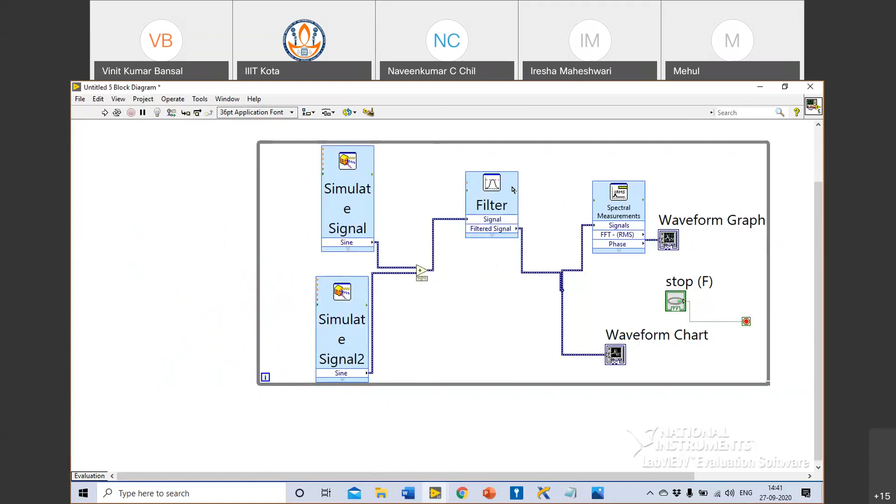I'll increase the order of the filter. I had used a third order Butterworth filter, but now I'll use a ninth order Butterworth filter. And we would see that the power of this noise signal should further go down. So the power of the noise signal now is less than minus 200 dB. Minus 200 dB is lower than the theoretical noise floor. So you can see that the signal has gone below the thermal noise floor, and hence the ninth order Butterworth filter in this case is able to help us reduce the noise signal to a very large extent.

Now, with that, I will jump on to another application which we had promised, that is the Talking Tom application. So people who had not installed DAQmx and were not able to follow me during the last session, from now onwards, will also be able to participate and make the program at their end. So don't worry if you don't have DAQmx installed, that is not needed for Talking Tom. All of you who have LabVIEW installed can work along with me for this program.

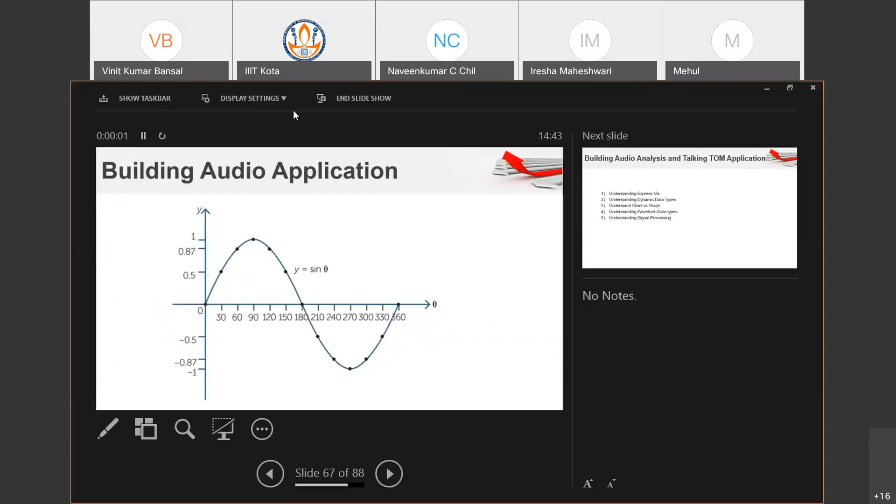So before I get into Talking Tom, I just want to deliver a small concept. Let's say I have these points, 1, 2, 3, 4, 5, 6, 7, 8, 9, 10, 11, 12, 13. So I have 13 points. These points represent what waveform? Sinusoidal waveform, right? Now let's say I plot these points in 1 second. That means this x-axis is not theta but time, and the 13th point ends up at 1 second. Then what will be the frequency of this waveform?

One by 2 pi. 1 by 2 pi, that's in the omega domain, but in the time domain, can I say it's 1 hertz? 1 hertz. Yes, sir. What if I plot these 13 points in 2 seconds? What will be the frequency of the waveform? 1 by 2 hertz. Yeah. Because I still have these 13 points, and my waveform doesn't finish in 1 second, but now finishes in 2 seconds.

What if I plot these 13 points in half a second? Let's say this point on the x-axis is 0.5 seconds. What's the frequency of this waveform? 2 hertz, right? Great. So if I have a waveform and I change the rate at which it is plotted on a graph, I can play around with the frequency of the waveform. Is that statement correct? If I change the rate at which these waveform points are plotted, will I be able to change the frequency as we just saw?

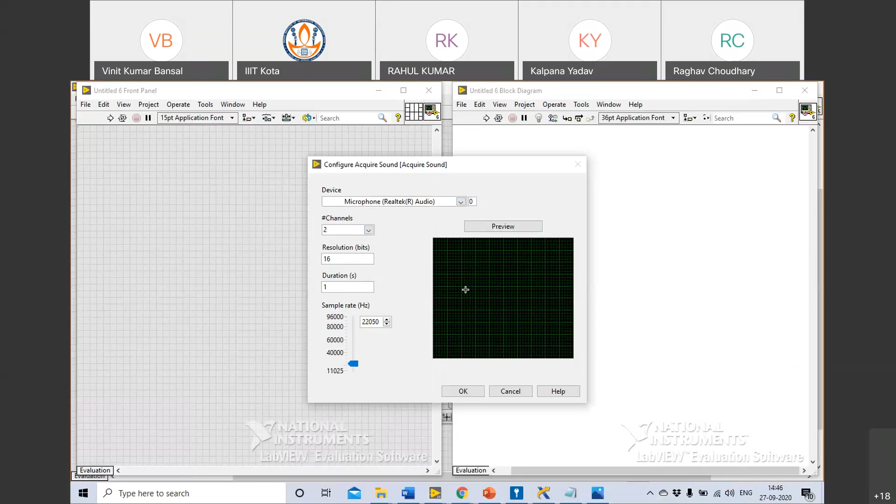So I'll use both the channels. I can preview my waveform here. So while I'm speaking, it is picking up the voice signal and putting it onto the graph. I will slightly increase this duration to 5 seconds. The rate at which I will acquire, I will keep it to 22 kilohertz itself. I can do it lower also.

Yesterday we discussed that human speech frequency is up to 3.4 kilohertz. So we can safely use 8 kilohertz also. Right now I'm using 22, but at a later point in time, we will reduce this to 8 kilohertz as well. Okay. And I can say, okay. Is it clear to everyone? Is everyone able to place this block onto the block diagram? Yes, sir.

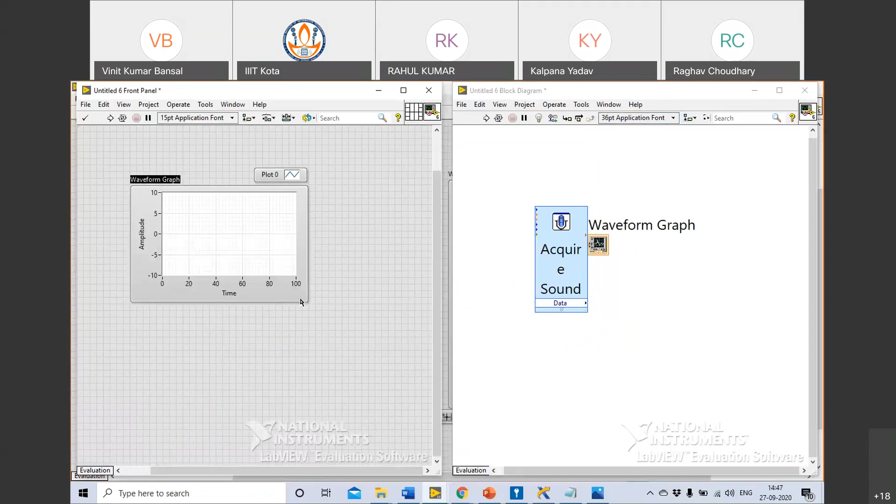Now, what we will do is we'll go to the front panel, go to silver, place a graph to see. Sir, what's the sample rate we have taken? Right now, we have taken 22 kilo samples per second. Okay, sir. So what we will do now is we will acquire this data and plot it onto a waveform graph. So on the front panel, we will place a waveform graph. And connect this to this.

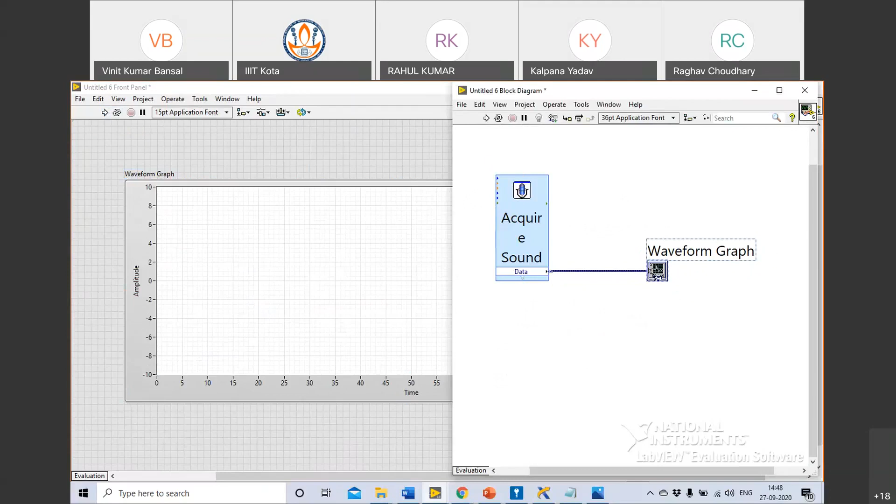Okay. Now we are connecting a waveform graph, not a chart, because what I'm doing right now is I'm not having repeated signals. I am just acquiring sound for 5 seconds and then plot it just once on the graph. Chart has a history. So in this application, I need not know about the history of my waveform.

So there's a request on the chat window to repeat the first step. Definitely we shall repeat. So I will delete whatever I had created. I'll go to the block diagram, right click, go to Express, Input, and Acquire Sound. In this Acquire Sound, I will choose microphone, channels, duration to be 5, sampling rate default. I only have one microphone device, so I'm using that. I would say okay. Is my voice audible? Yes. Is the step clear now?

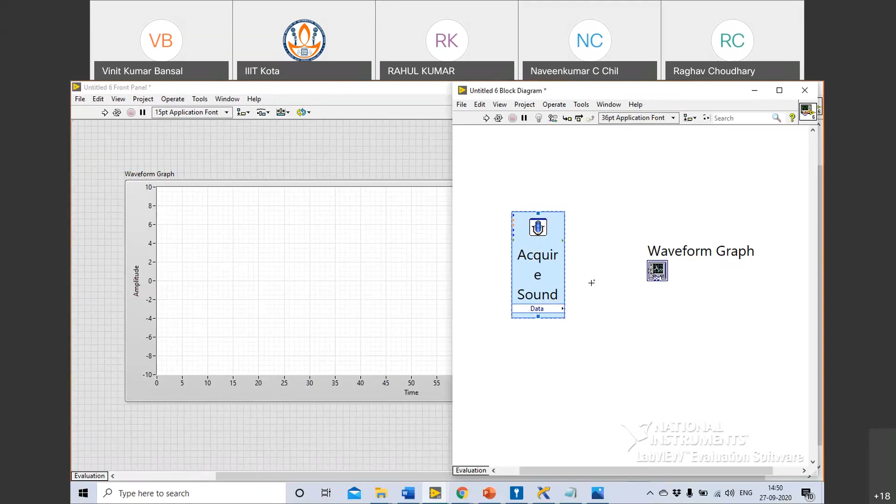Sir, actually, it did not ask me the permission about that microphone. Permission about the microphone? You have the microphone device connected? Yes, sir, I have 2 microphones, but it did not prompt any dialog box. When you place this Acquire Sound, it does not prompt any dialog box for you? Yes, sir. Can you delete that and place again once? Yes, sir. Just a minute, I will try. Okay. Yeah, now I got it, sir.

Okay, great. So once you have set the settings to duration 5 seconds, sample rate default as 22 kilohertz, and choose the correct microphone. I only have one, so I've chosen that. And you can then press OK. Once you have this placed, you can create a graph on the front panel and wire the graph to the signal being acquired from here.

Okay. So what I'll do now is on the front panel on the graph, I will right click, visible items, and graph palette. I will make the graph palette visible so that I can zoom in into the waveform which will be acquired. Anyone, any question? Okay. Now I'll test this out.

Let's say while I run this, I'll keep speaking something so that it's recorded on this graph. We'll say, hi, my name is Vinit. I'm conducting a LabVIEW workshop. Yeah. So this is the waveform of the audio signals captured by my sound card. I can go into each of these and analyze.

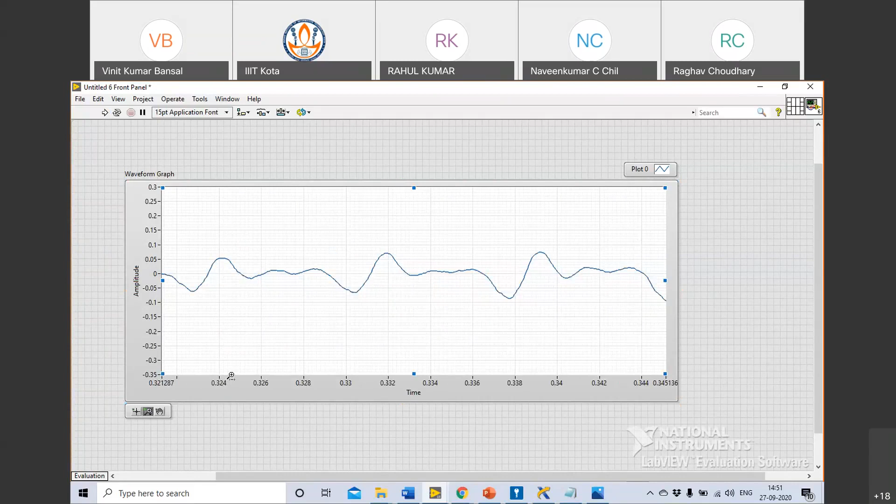So it shows only after 5 seconds, not instantaneously. It is not showing, right? That is because, Raghav, we have requested this block to record for 5 seconds and then give us data. If it was an actual real world case, while we would have met face to face, we would not have acquired this using your sound card. We would have acquired this using the myDAQ device, which has a microphone jack. That can give us much better control on at what rate we can acquire data.

After, let's say, 1,000 samples, we can keep streaming data back to host, right? Keep streaming data back to LabVIEW. But with sound cards typically, it takes a considerable amount of time to get back data from the sound card. So we don't do continuous acquisition from the sound card right now. Even if we do, we will keep missing some data in between. So we are requesting the sound card to record for 5 seconds and then just give us those 5 seconds of data.

Okay. In an ideal scenario, I would recommend to use a myDAQ or any industrial DAQ system which has a microphone input to acquire these kind of signals. But sorry for the lack of resources. We are in a different world in 2020 where we can't meet in person and do this kind of trials and exercises. So anyways, we have acquired data.

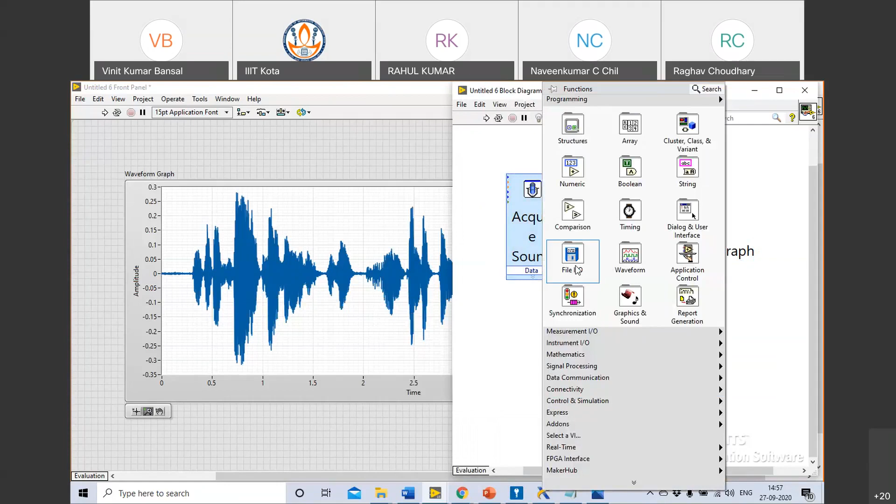Now I'll answer a question which one of us asked in the last session. What is this Express? Why are we going into Express again and again? So basically in LabVIEW, there are 3 kinds of functions. One is Express functions. One is low-level VIs. And the last one is the inherent nodes which are present inside LabVIEW. These are the inherent nodes. These are the subVIs, or low-level VIs, and these are called Express VIs.

Do you see any color differentiation between them? An Express VI always has this blue background. Whether I place a filter or an acquire sound, both of them have a sky blue background, right? So these blocks are called Express VIs because these are the ones which can be used to quickly acquire or quickly do a function through the GUI itself. In the graphical user interface itself, I can put all these settings and do my job.

So these are very easy to use, but they also have their own disadvantages. The advantage is that the ease of use is the highest with an Express VI. I can simply double-click and change settings. But the flexibility is something you lose while you use Express VIs. So once you become slightly experienced in LabVIEW, you will stop using these Express VIs and will shift to low-level VIs or the inherent nodes.

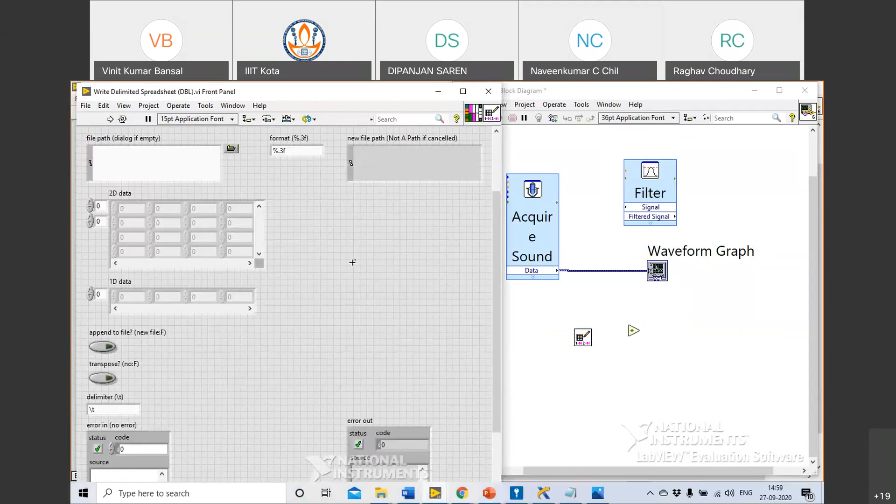These inherent nodes, which are yellow in color, cannot be opened further, even if I double-click. But if I double-click a low-level VI, I will be able to open its front panel, and further access the program written on its block diagram.

So what are the three different kinds of VIs? Express VIs, low-level VIs, and inherent nodes. Is that clear?

Among these, which ones we call low-level VIs? The IOs are low-level VIs, not the inherent nodes. A low-level VI is something which can be opened, and I can see a block diagram or front panel for it. In a low-level VI, I'll have to wire a lot of inputs and outputs to make it work, whereas on an Express VI, I have to do minimal wiring to do the same thing.

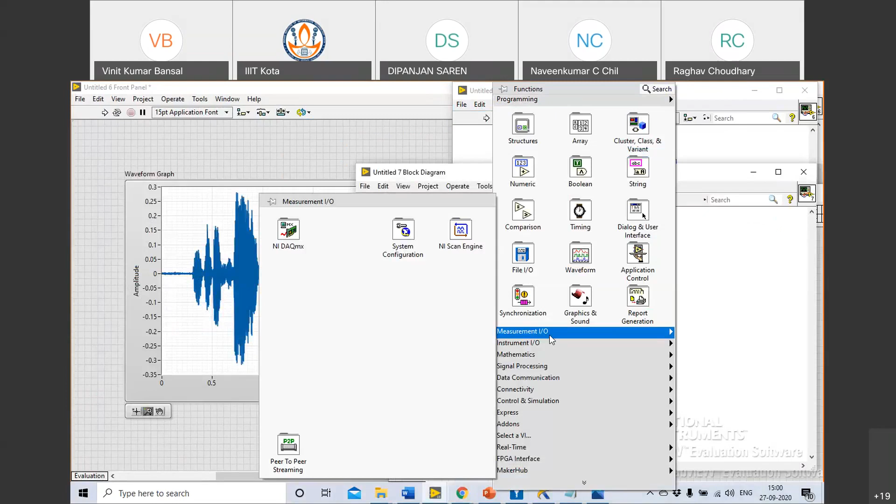Just to give you an example, last section we did something called DAQmx. We acquired data from our MyDAQ using the DAQ Assistant, and acquired an analog input. Finish - I'll leave it to default for now.

So we used this to build this block, but I can also do the same functionality using low-level VIs, though I'll have to use many more of them and connect them together.

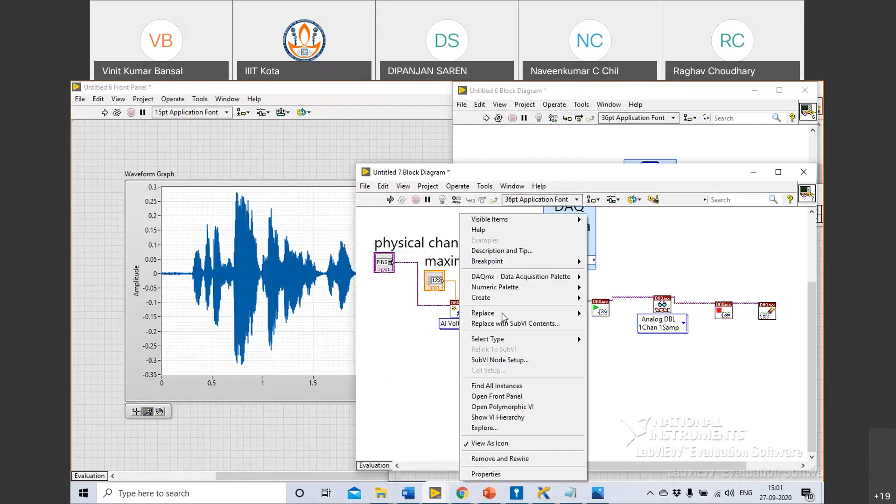Now if you can see these low-level VIs, I can change their maximum and minimum value, and which channel I need to acquire from in real time. Do I have that functionality here? Can I change that during runtime? No, because I have to double-click this block, and during runtime I cannot double-click and change the value. Whereas in the case of low-level VIs, I have these controls at my hand - I can change them during runtime also.

So the functionality which I have made here using low-level VIs is the same as the functionality written under this DAQ Assistant block. The only advantage is I get more flexibility.

Sir, one more thing I want to ask - it's a bit out of context, from the second session we had in the day. We used some spectral analysis block, and there we were getting a Fourier transform output of the frequency of the signal - a frequency domain output for the given signal. We used the waveform graph to plot it. My question is, why is that waveform graph named amplitude and time? If I am plotting a Fourier transform signal, it should by default take frequency as its independent scale, with amplitude still okay, but it's not taking it like that. So is it some error, or something overlooked in the design?

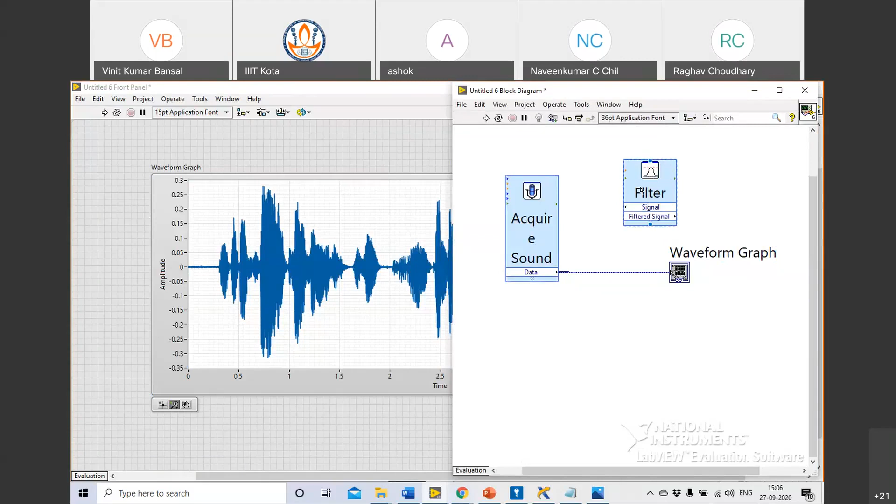So now, what I was explaining was that these are express VIs, right, and the low-level VIs were on the other screen. Why I brought up this discussion of express VI is because we learned about data types in our first class. The data type coming out of our express VIs is called dynamic data type. Now I want to convert this dynamic data type into my waveform data type. Now what is waveform data type?

To really understand waveform data type, let us first understand arrays. On the first day, Parikshit sir had talked about arrays. What is an array? It's a similar data type—one data type having multiple elements of the same data type in either 1 dimension, 2 dimensions, 3 dimensions, and so on. So how do we create an array? I go on the front panel, right click, place a silver control, go to array, and place an array.

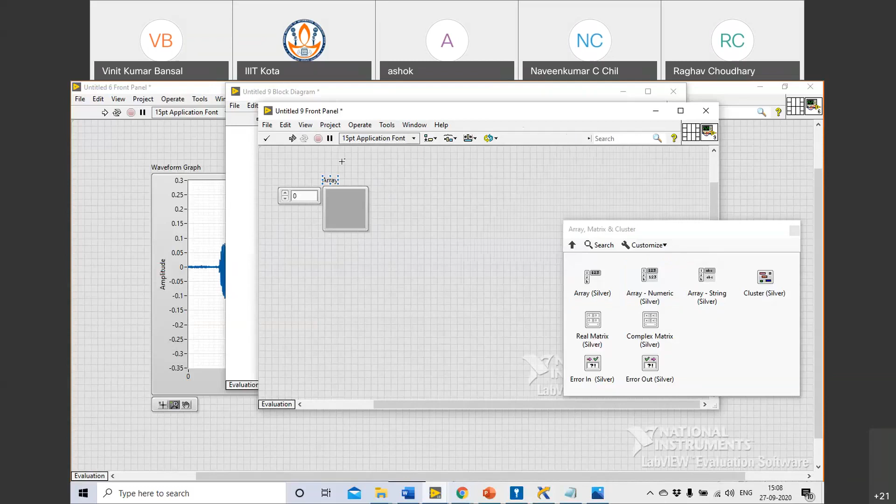Inside the array, you can see this array is black in color. What does black color represent? Black color represents that the data type is not yet defined in LabVIEW. To define a data type, I will go to the front panel, go to silver, and add a numeric control to my array.

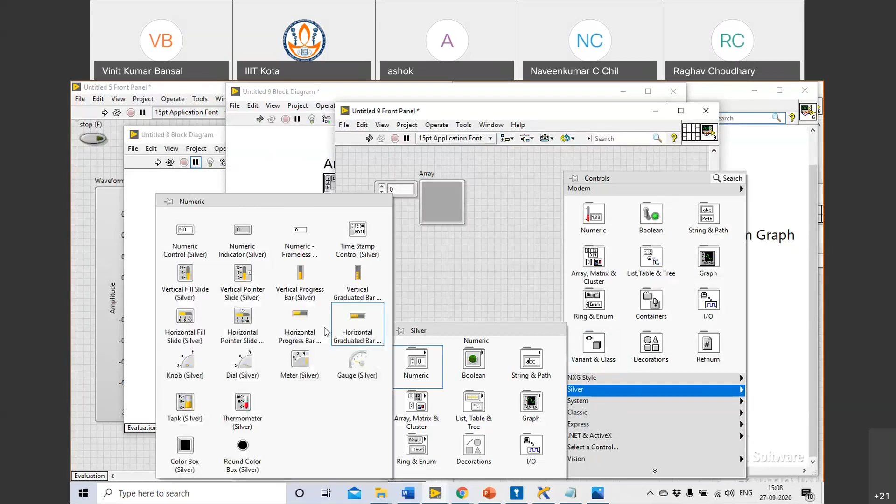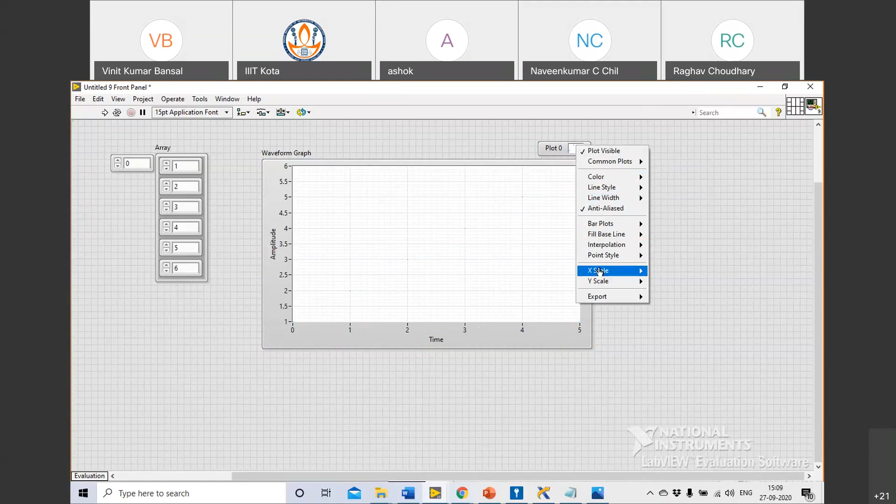Now I will add 1 here, 2 here, 3 here, 4 here, 5 here, and 6 here. So these are 6 elements: 1, 2, 3, 4, 5, 6. If I plot it onto a chart—let's say a waveform graph—and go to the block diagram, you need not do this, just look at the screen. I will run this. What you would see is these points plotted at 0, 1, 2, 3, 4, 5. I can change the plot type so we can visualize this better—plot point style. You can see these points plotted here.

Can I by any means give an array timing information? An array is just a set of numbers—it is not giving me any sort of timing information. Am I right or wrong? You're right, sir. What if I want to give timing information along with these numbers?

Can I give timing information in an array? We just discussed that an array is of a similar data type, meaning all elements in the array should be of the same data type. So what do we use for elements which have different data types? In C, we use structures. A structure can have string data type, array data type, Boolean data type also, right?

So what I'll do is create a structure in LabVIEW now. A structure in LabVIEW is known as a cluster. I go to the front panel, right click, go to silver, go to array, matrix, and cluster, and place a cluster. If I look at the data type, this is again black in color—why? Because I have not defined the data type of this cluster. I will break this wire, bring the array inside this cluster, and say auto size to fit. I have this array inside this cluster now. On the block diagram, this has become pink, and the array is missing from the block diagram. Is everyone with me right now?

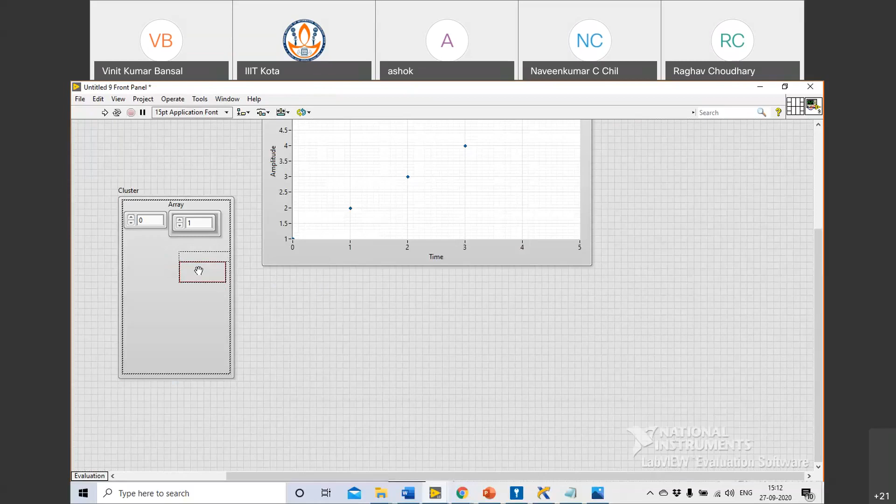Now I will add a numeric constant again, or a numeric control again inside the cluster. So one data type is an array data type, but the other data type is Numeric. Can I add a Boolean also to this? Yes, I'll go and add a Boolean also. So what we have now is an array, a numeric, and a Boolean together into the same element, right? This is called a cluster in LabVIEW. This is known as structures in C.

Now we have got an array element. Can I define my T naught here? Can I give T naught here? T naught would mean the time difference between two samples. Can I give it as 0.1 seconds? By doing this, can I integrate the timing information into my data? Do you agree or not?

No, sir. Okay, that means I'll explain it again, sir. I had this array separately outside first, right? This array had 6 elements: 1, 2, 3, 4, 5, 6. That is agreed, yes sir.

If I ask you to plot these 6 points on the graph, what will you do? You will just plot them against index, not time on the x-axis. The 0th index value 1, first index value 2, second index value 3, third index value 4, fourth index value 5, fifth index value 6. Right? But what I want to give is timing information.

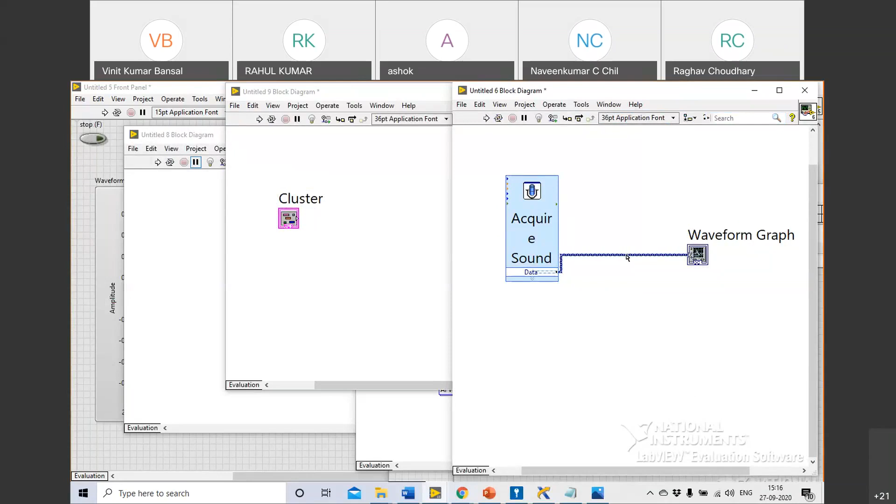This blue wire was a dynamic data type which came out of my Express VI. What I want to do is play around with the frequency of the signal so that I can make a talking tom, right? So what I'll do is first convert this dynamic data type to a waveform data type. How do we do that? Let's see - go to the block diagram, press Control+Space, and say 'convert from dynamic data'.

As soon as I place this on the screen, it gives me various options. Now, what I want is an array of waveforms. Why an array? Why not a single waveform? Why am I selecting an array of waveforms and not a single waveform?

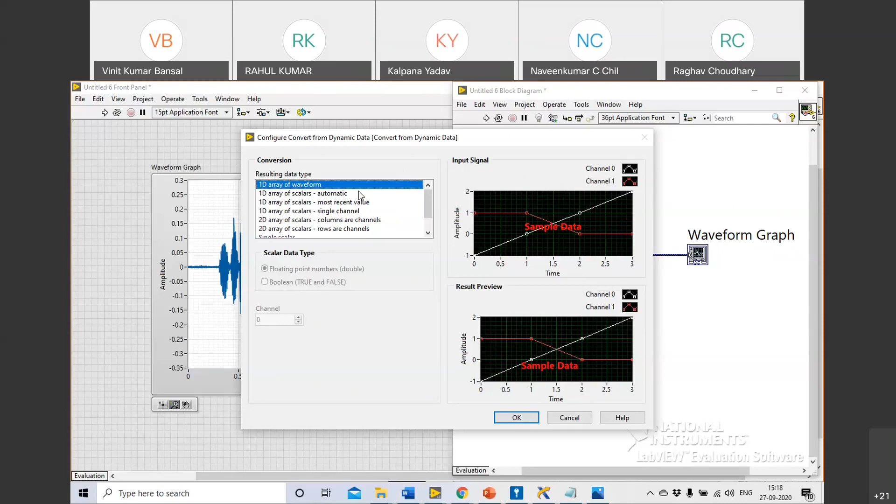How many channels did I select in my acquire sound block? Channel 2. Two, right? Since I have two channels, I will have two waveforms: one for one channel of the microphone, second for the second channel of the microphone. Agreed or not? Yes, sir. So I will choose 1D array of waveform, and I know there will be two waveforms if I connect this dynamic data as the input to this.

To confirm whether you had two channels or not, you can simply come to your front panel where you had plotted your sound signal. Just expand this. There's plot 0 mentioned. Just expand this. And once you have expanded, let me know. Then I'll talk about the next step. Okay. Once you have expanded, you see plot 0 and plot 1.

I'll go and click on the waveform, this line of the plot 0, and uncheck plot visible. So you can clearly see there is another waveform which is overlapping the first waveform, which is nothing but the second channel of my microphone.

Sir, kindly come again about that. Okay, no problem. Let's do that again. So you have this waveform on your front panel, sir. You have acquired the sound waveform. No, sir. Okay. You have this acquire sound block on your block diagram. Yes, sir. Okay. On your front panel, can you create a waveform graph? But that is the issue.

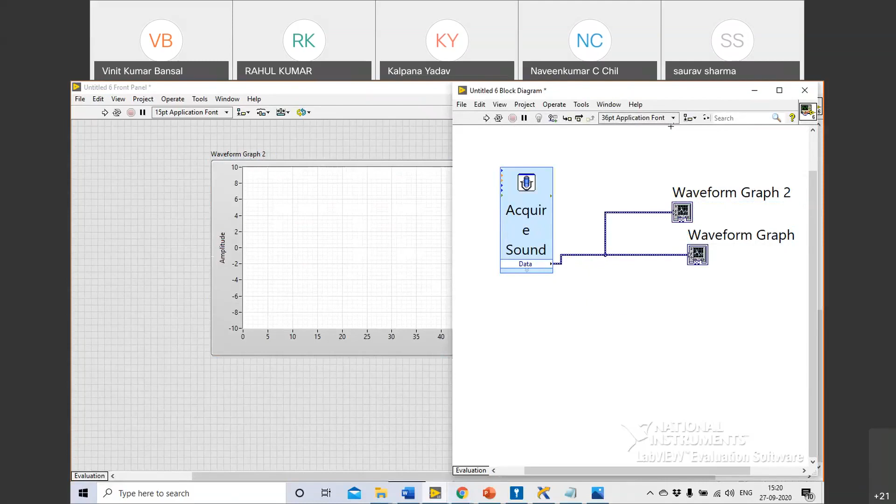Okay, now is the wire connected between the data output terminal of the acquire sound to the waveform graph? Yes, sir. Now acquire your sound. Let me acquire it along with you. Hello, my name is Vinit. I'm doing a workshop on LabVIEW. So you can see the data got acquired. In your case, were you able to acquire? Yeah, I'll just. I'm sorry, Saurav sir, I missed your voice. Okay, just test it out and let me know whether you got this data.

Now, what I'm claiming is this is two channels. Yes, sir. Got it? Great. What I'm claiming is it is two channels, not one channel. And if you drag this, there is a plot 0 mentioned on top of your graph. Expand this. While you expand this, you will find there are two. You can actually expand it further also, but that does not mean our waveform has that many channels. You can expand it to, let's say, plot 4 or 5, but start making each one of them invisible.

So let's say I make the first channel invisible by removing this plot visible property. So you can see there is a red waveform, which represents the second channel. I come to second channel and make this also invisible. Do I have any other waveform here? No. That means I only had two channels in my data.

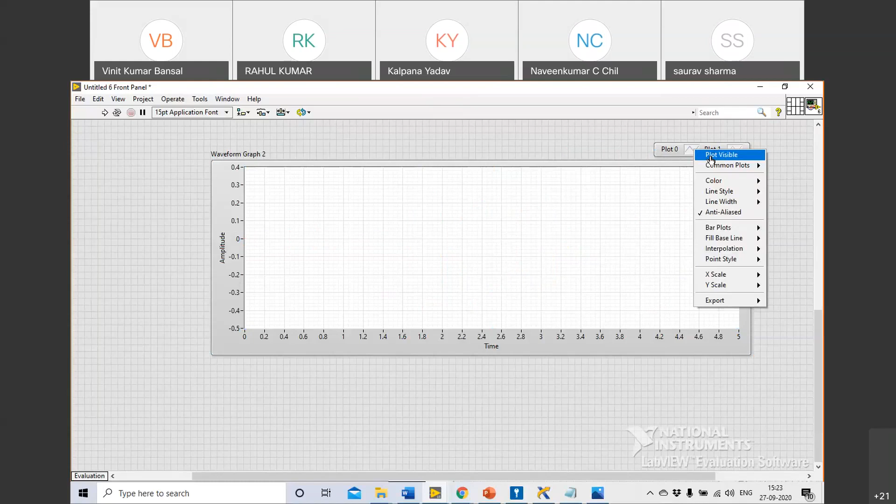Okay, so we have these 2 channels here. So what I was explaining is this is a dynamic data type. I want to convert this dynamic data type into a waveform which gives me all the sample points. That means each of these voltage points or each of these sound level points along with the time.

And as we understood on the other window, to have time we need 3 things. One is the data points, the time between 2 data points, and the timestamp. And these 3 things I am claiming are available as a part of the waveform data type in LabVIEW. I will show you now how to convert this dynamic data into the waveform data type.

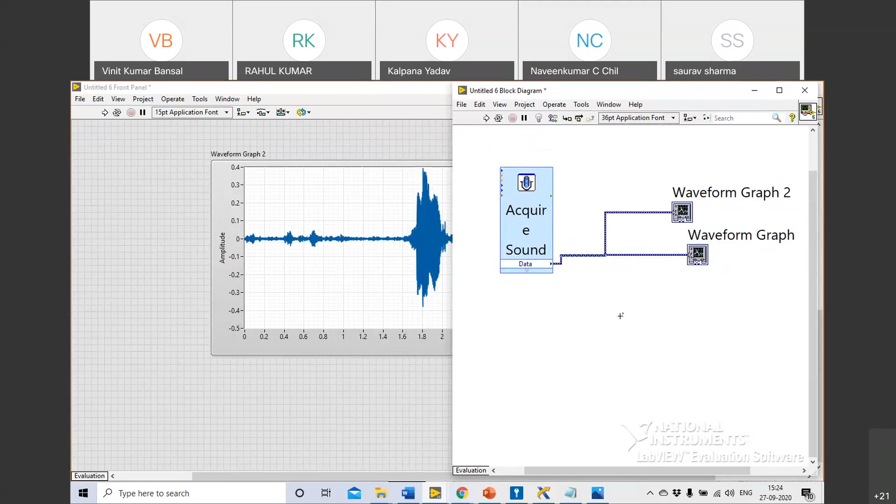Sir, do we need to create the waveform graph too? No. I just did it for one of the participants. He did not have data on his graph, so I was just helping him out. Yes, sir.

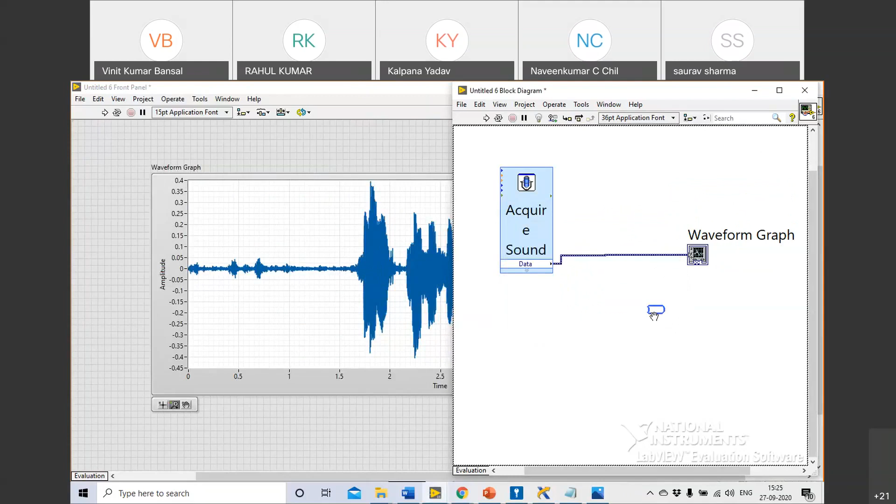So now come to the block diagram. Press Control Space. This brings up the quick drop window, and type convert from dynamic data. As soon as you do that, you find a pop-up box asking what data type you want to convert into. Since we are convinced that there are 2 channels of waveform in the data, I am using 1D array of waveform.

And I will connect it to this input terminal. Now the input is the dynamic data type. The output is array of waveforms. Now what I'll do is I'll again convert it back to dynamic data type for the moment and play the sound.

Sir, actually, I think I missed this one. I have opened this convert from dynamic data. What is the next step, sir? Choose 1D array of waveforms. And say okay. Okay, sir.

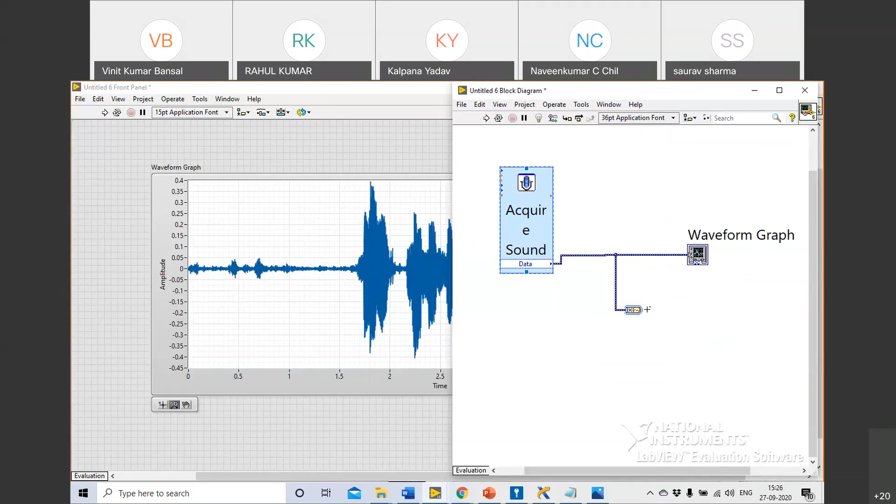So you have got your waveforms now. I can start manipulating these waveforms, or I can first play these waveforms to see whether my loop is working, whether I'm able to acquire and then generate it back or not. Let's try that. I'll keep it like this, and I will go to Express on the block diagram, go to Output and say Play Waveform.

You can test this device. So I have 3 speakers at my end. One is the headphone. One is the speakers on my laptop. And I have a secondary monitor connected, which is from Videocon. That also has an audio output. So I have 3 output devices. I will choose the speakers of my laptop to test this.

If I click test, it will have a sine tone signal played. You could hear that. Yes, sir. So if I click test device, I can hear a sound being made. So I'll place this block, choose speaker, and say OK.

Now, without manipulating any data, I can simply play back my waveform first. I'm not using this right now because this I'll use to make Talking Tom. What I'm doing right now is acquiring and simply playing back just to check whether my microphones and speakers are working fine or not. So I will run it.

Now, don't make your program, just look at the screen for a couple of seconds. So I'm running this, and I would speak out something. Say, my name is Vinit. You saw that the recorded waveform got played back. Yes, sir. So you can try it out at your end.

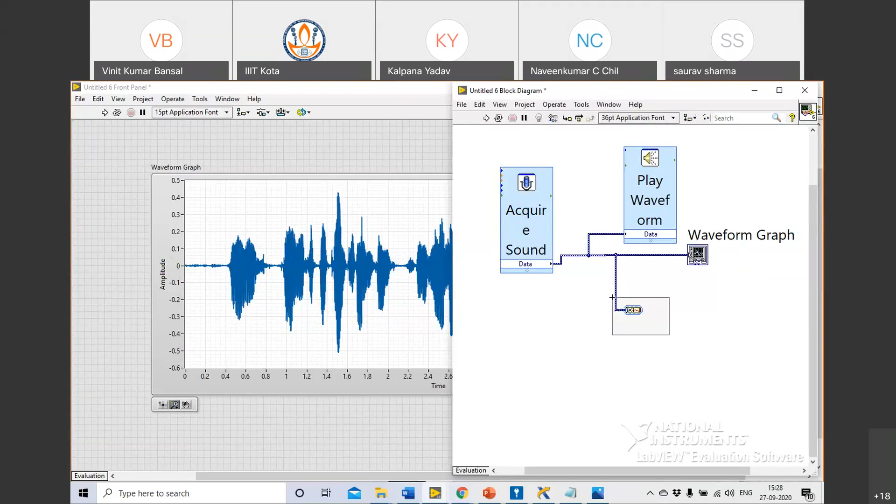So directly connect the acquired sound output to the play waveform. This manipulation I'll teach in a couple of seconds, but just test this piece out: acquire connected to waveform graph and acquire connected to play waveform. Once you have tested it, let me know. Then I'll talk about the next step. One of us says tested.

Participants, I know it's a Sunday afternoon. Hi. Hello. Okay. Sorry for that, sir. Actually, I was testing. It is replicating my voice. Understood, sir. No problem. You can test it while you keep yourself mute on WebEx. Sorry, sir. That's fine. No problem.

Okay, so we have this block. Now we know that we are able to acquire and play the waveform. If anyone is not able to do that yet, let me know. Otherwise, I'll move forward.

Okay, I'll move forward. I take that as yes.

Okay, now Vinit, yes, sir. One thing you tell me: while converting from dynamic data type, you have selected 1D waveform, right? Yes, sir, 1D array of waveform. Why have we not taken that channel one? Which one, sir? You have said now we are acquiring from 2 channels. Right, sir. Could we have chosen that 1D channel, suppose we are acquiring from 1 channel only?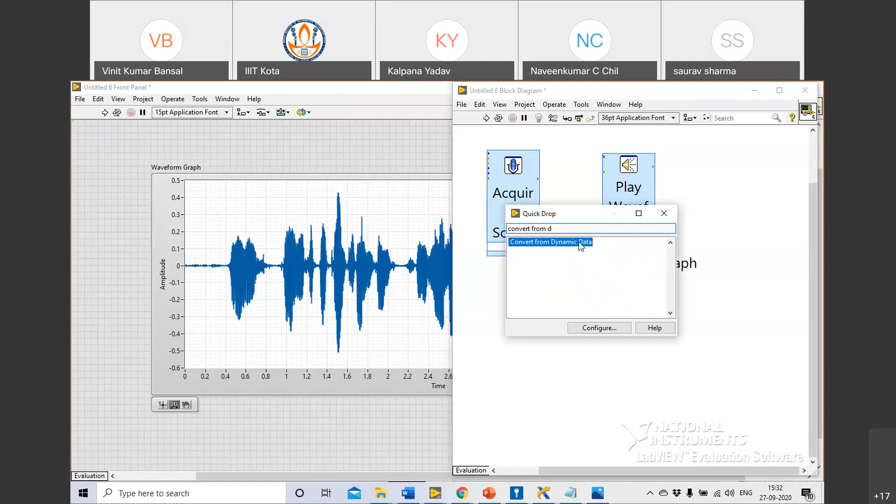Okay, so we'll choose 1D array of waveforms here. I'll quickly do this step again; some of us might have missed it. I'll go to the block diagram, click on the screen, press Control Space and say convert from dynamic data, and place this block onto the screen. As soon as I place it, it asks me for options, and I choose 1D array of waveforms, put it as input. Now I have 2 waveforms here. If you want to see, simply create an indicator to this.

Sir, I have a small request. You have enlarged the font size, but they are not looking standard. Can you just make them as they were earlier, if it's okay? The fonts are bigger than the icons. Okay, I can change that, sir. Not a problem.

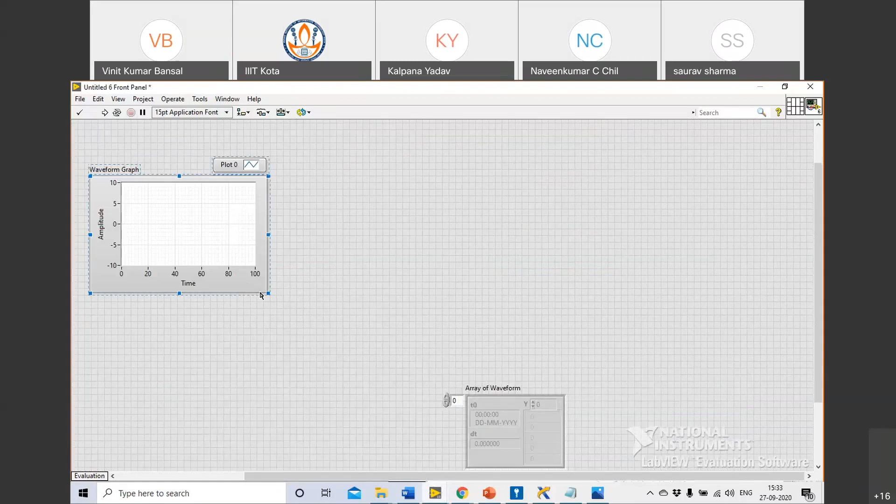Font dialog. Okay. Let me test that out. Yeah, it works. I will place some of them again so that you are able to visualize this better. We can read acquire sound in a single line here, but in the screen sharing it is 3 lines, a kind of distraction. Understood, sir. I'm making it a smaller font size so that you're not confused. Express output. Waveform. Okay, now it looks better.

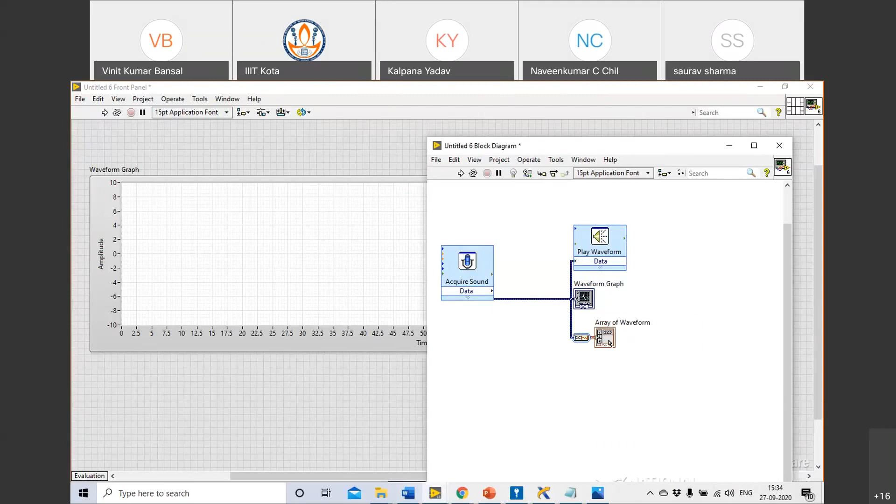So what I did is I placed this block of convert from dynamic data type into 1D array of waveforms. I got the array of waveform. On the output of this block, I right-clicked and said create indicator. If you go to the front panel, you will see the exact same thing we learned on the other screen: we'll have multiple samples, which is the array of sound levels, and there will be T0, the timestamp of the start of the waveform, and the sample time between each of the data points. Has everybody got that?

And in fact, this is not just one element of that kind, there is an array of that kind. So let's simply try this. I will acquire sound for 5 seconds. It's right now acquiring sound. Let us see once the graph is plotted. You can see the graph data is plotted onto this array waveform.

I have 2 channels. As soon as I make the array index 2, I don't see anything. That means there are 2 elements in this array: element 0 for one channel, element 1 for the second channel. Is that clear to everyone?

Sir? Yes, Raghav? Sir, here, as we can see, the arrays can have infinite length even though they don't have any data, right? I mean infinite element boxes. On 0 and 1 we have the 2 channel outputs, but we can still go to 2 and see that no data is there. So that means it is kind of an ArrayList in Java, right?

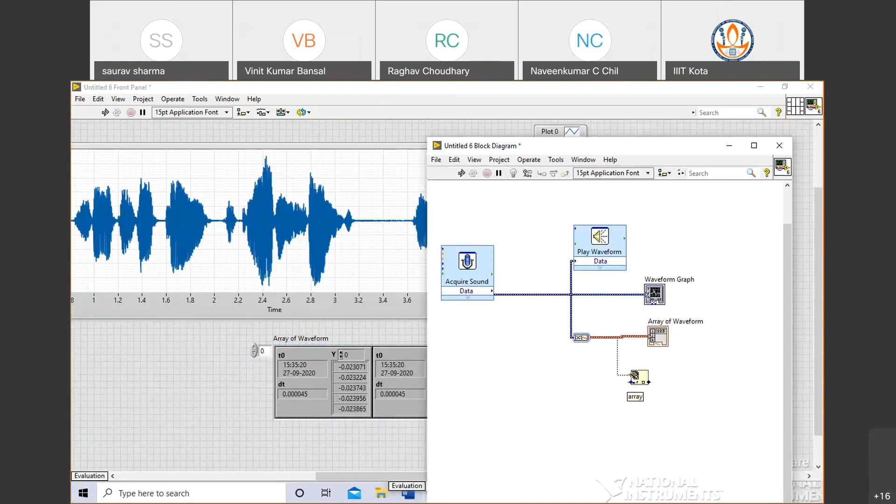How we will manipulate is, now this is an array of 2 elements. I will index this first. Index array and get the first element out of it. Indexed, got the first element. Index means getting an element at a particular index from the array. So I want to get an element from the 0th index of the array. Now I will press Control space and look for a function called get waveform attributes or get waveform components. And I wire this here.

Everyone done till this point? We will have to be a little faster. After the indexing, what have we done? Press Control space on your block diagram and say get waveform components. Then drag it down to 3 elements and then wire it.

Sir, actually, after the array of waveform, I did not get the next step. Okay, so after this, you know that this has 2 elements and I want to play around with each element. So right click on the screen, go to array and say index array. I basically want to index a particular element from the array. So I use the index array function, connect the array to it and choose the index which I want.

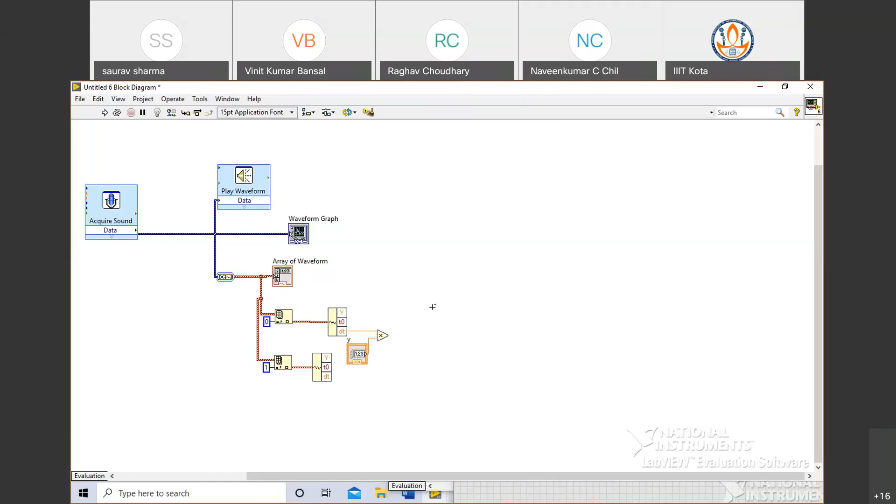Everyone done till this point? Participants, please help me understand if you have been able to reach this point. If not, let me know. I can help you. Yes, sir, done. Great. Thanks for the feedback, ma'am.

And now I'll search for another function called merge or rather build waveform. I'll use the function called build waveform, expand it, and choose the attributes accordingly. I will pass through Y elements as it is. I will pass through T0 information as it is. I will pass dt multiplied by a constant to dt. And I will do the same for the other channel as well.

Are you getting my point as to why I'm doing this? Basically, I will now manipulate the time between two different samples to change how my voice looks on the speaker or how it is heard on the speaker. Then, post it, we use the build array feature to remake our array.

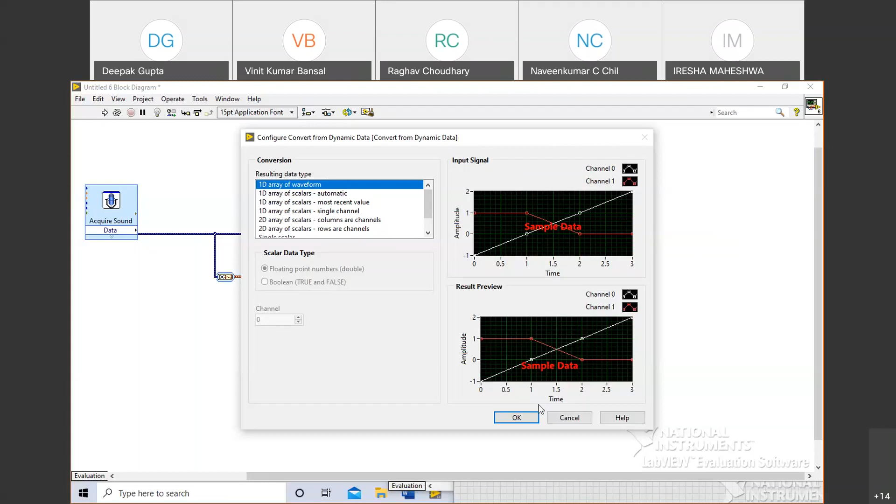Let's test this out. If I multiply dt by 0.5, then my dt will become half. That means the sample time between 2 data points will become half, and whatever I speak will sound like Talking Tom is talking. So let's try that out. I'm running my program. Hello, my name is Vinit. I'm conducting a LabVIEW workshop.

Could you hear that? Not okay. It's set to earphones. I'll make it to speakers. Hello, my name is Vinit. I'm conducting a LabVIEW workshop. Hello, my name is Vinit. I'm conducting a LabVIEW workshop. Now, were you able to hear that?

Yes. I can keep manipulating the multiplication factor for the dt to keep changing it. What if I make it 2? Now, instead of reducing the time, I increase the time between 2 samples. Let's try that out. Hi, my name is Vinit. I am conducting a LabVIEW workshop.

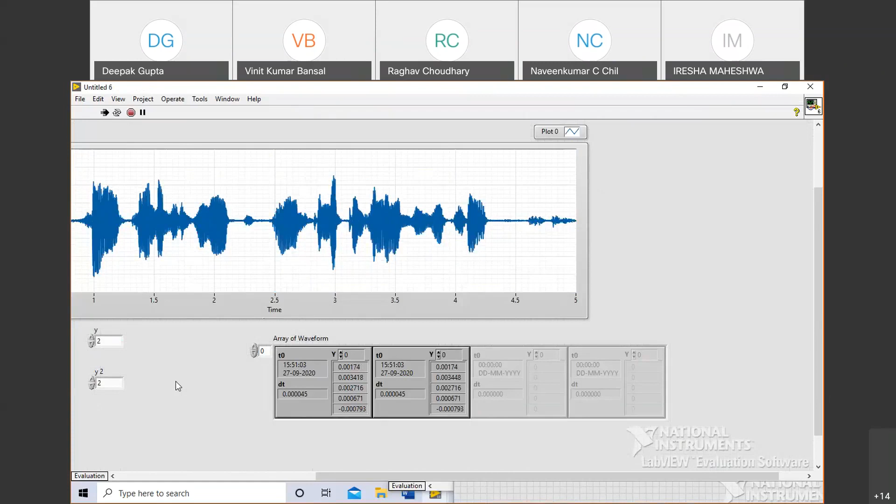Yeah, you could see how we could. Sir, we couldn't hear anything. Some kind of noise was there and that's gone. We couldn't perceive anything logical or sensible. Okay, no problem. Try it at your end, Raghav, because I'm running it on my speakers and then it is going from my microphone to your side. So there will be distortions, but try it at your end. Are you seeing similar trouble at your end? Sir, I'll try it right now.

Sir, what we are doing over here is changing the time duration between two samples, right? Yes, throughout the waveform. Throughout the waveform, we are changing the duration between 2 samples, and that duration is causing a change in frequency. As a result, we get to hear a different kind of voice. Absolutely. And that is how a Talking Tom works, right? So a Talking Tom basically increases the frequency of whatever signals it captures. So that is what I did here.

Okay, let's see if you can hear it this time. Let me change the audio out to my television, which may have a better sound level.

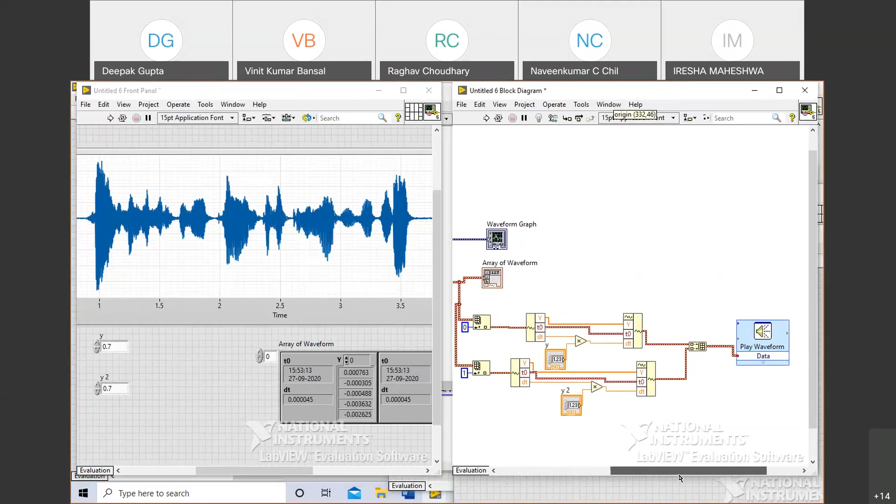Sir, these two create waveform boxes are showing a mirror image. Y0, T0 and DT are showing on the left side and this waveform is showing on the right side. So that means you have used a block called create waveform. These first blocks are get waveform components, and these blocks are build waveform.

Sir, in build waveform components, I can see two outputs of the waveform. It is designed like that so that we can take multiple outputs from the same block.

You are talking about this input? Yes sir, is that the output or input? That's an input, Raghav. What happens is, let's say my Y is same, I am not changing anything on the Y. My T0 is also same. So what I can do is reduce this, reduce this as well, and pass this waveform directly here. Only the DT of the waveform will be manipulated.

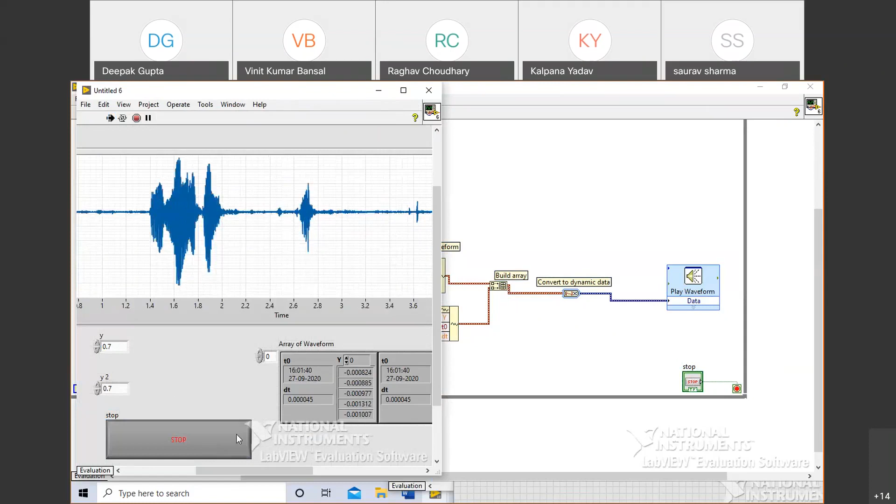You cannot, ma'am, because it's recording your waveform for 5 seconds. For the first 5 seconds it will continue to record, and for the next 5 seconds, or whatever constant you write, it will continue to play. So each iteration is running for around 8.5 seconds right now.

If you want to reduce this time duration, let's say you want to record for 2 seconds, that is okay. So you can say, hi, this is Vinit, I'm talking, and it'll continue to talk, continue to record.

Got it. I think now my application is working, sir. It's feeling like we are using it on a mobile phone. Yeah, we will not be able to mimic that professional application in this short span of time, but definitely you can build that level of application also. I have built it in the past, that level of application also.

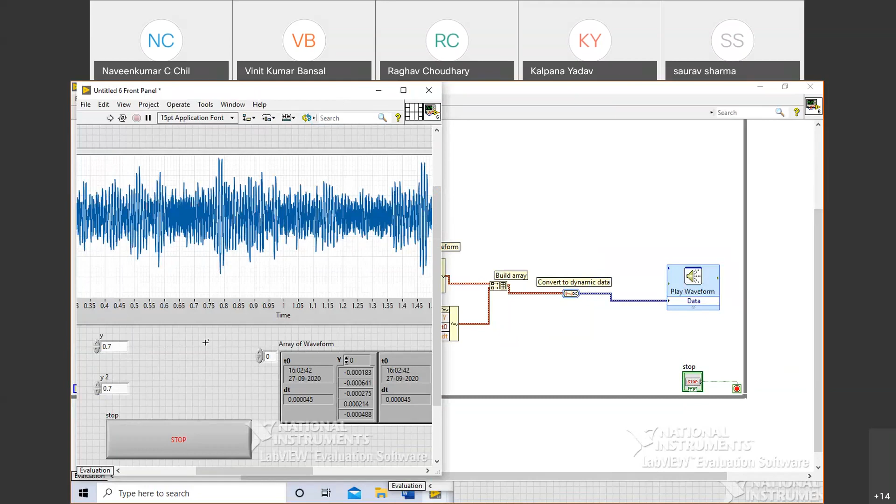Okay sir, but in that application I think it was automated, meaning it listens for a certain set of time and repeats by itself. Oh okay, I have not used that for quite a lot of time now. So just now it gave the same feeling, so I just said it, sir.

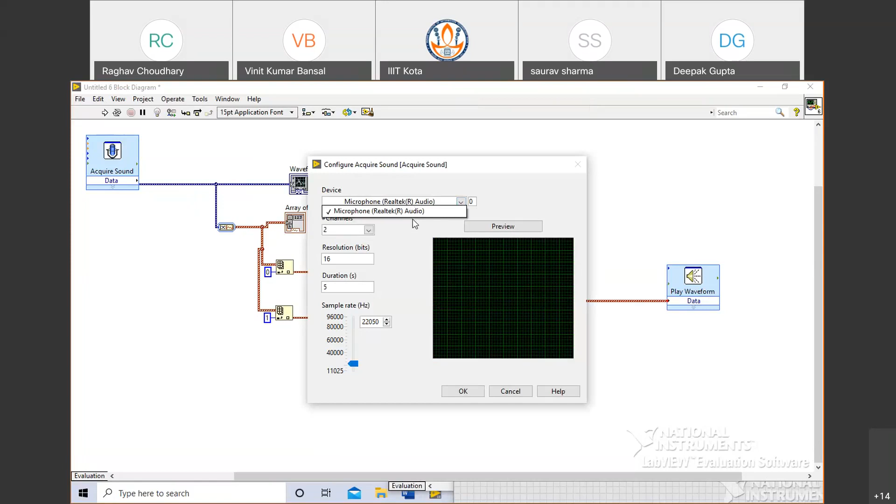And sir, as I can see in the block diagram, there's an option for connecting a device, like a wire loop coming from there so we can connect an external device. Does LabVIEW have any audio device we can connect, like a waveform graph? You mean this device index, this device input? Yes sir, this device input.

This is just a number, Raghav. Let's say right now the microphone, Realtek audio, on my laptop is assigned number 0. So during runtime, let's say I run it first with the first device, and then I want to run it with the second device, I can just increase this device index.

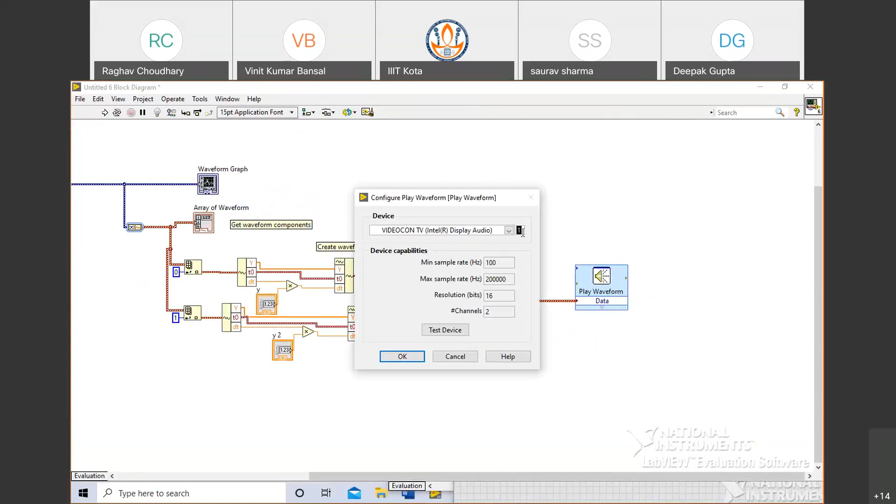And for playing the waveform, let's say right now I'm playing it on my Videocon television. These three are detected by my sound card, but if I want to play it on something else, I can create a control for this device and give a different index. If I give 2, it will play on my headphones. So basically this block will identify all the speakers and microphones, assign an index number to each, and we can give an external control to change it during runtime. Absolutely, with the control.

Now I'll answer your second question. We are engineers here, aspiring to hit the industry or at the verge of building our careers. Why are we learning about sound here? Is it really needed in the industry? When we go to industry, we don't acquire sound using our computer's microphone because it doesn't have that level of sensitivity.

In industry, let's say we have to do noise, vibration, and harshness analysis on a car. Let's say Maruti is building a new car and wants to launch it in the market. Before it hits the road, they have to get certifications from agencies like ARAI in Pune. While getting certified, they have to prove the sound level of the car is not beyond a certain level, so they won't use a laptop microphone. They will put a professional microphone there, typically from a company called GRAS.

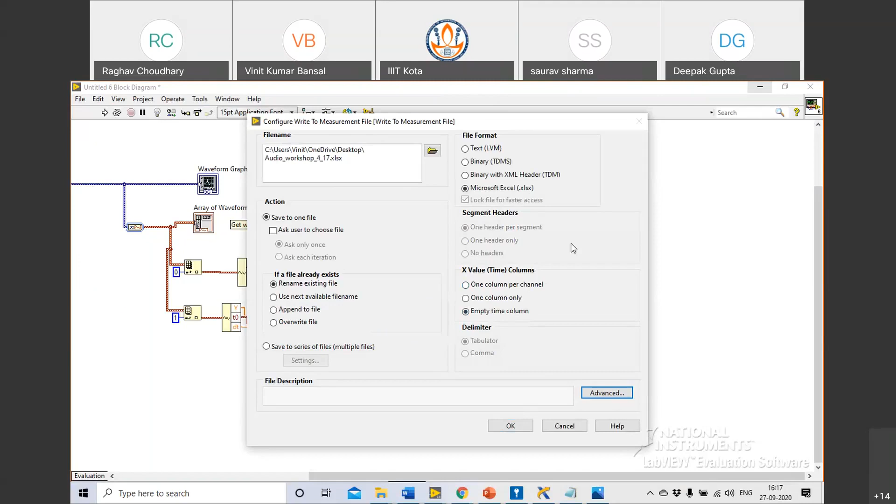Now, if I wire this data, this will directly go into the Excel file. Okay, selected. I added a control here just to show. Now, if I run this, I will be able to store this data into an Excel file. Okay, this is my Excel file. We'll see a couple of zeros at the beginning, and then towards the end, we'll start seeing your data waveform.

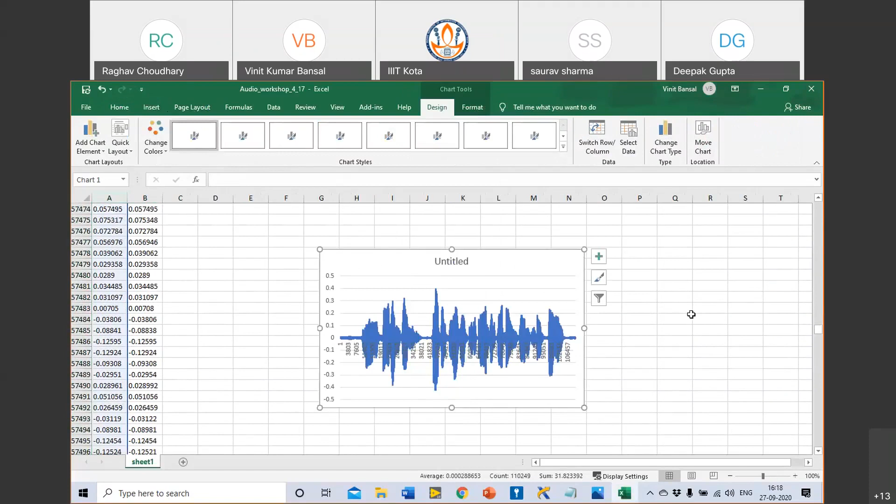Can you see these data waveforms? All of them are around 0, but 0 point something. You can also plot a graph here. Yeah. So the exact waveform which showed up on the LabVIEW front panel is being written to an Excel file. There's another way to write this to Excel. Once you have acquired this data, you can simply export it to Excel.

Okay, but that's not an automatic way. The previous method was an automatic way. Any doubts on this? Should we move on to the machine vision section? So write to measurement file, where you have taken it from: File I/O, then Write to Measurement File.

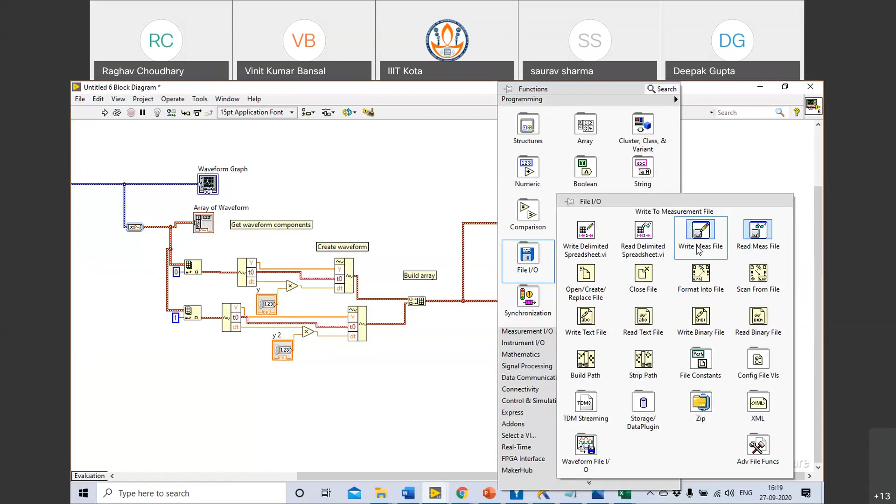But I couldn't find it. Write Binary File. Sir, in Modern only or in Silver? Raghav, it's a function. It has to be on the block diagram, not on the front panel. Achha, okay. Okay, sir, I'm in the block diagram. File I/O, Write Measurement File, Write Delimited Spreadsheet. Achha, yes. Okay, got it, sir. Got it? Similar way, you will have Read File, Read Measurement File option as well. Yes, sir. Okay.

With that note, I hope all of you could understand the signal processing application. Let's jump on to the machine vision application. We have got another 40 minutes. I'll try to do justice to the next 40 minutes. So how many of you have installed Vision Acquisition Software and Vision Development Module? Vision Acquisition Software I had given as optional. How many of you have not installed that? Could you please put that on the chat window?

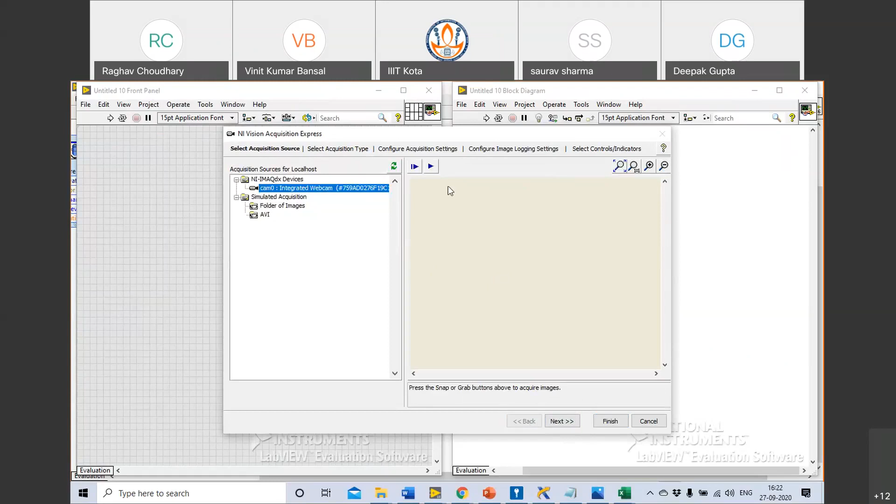It asks me for various options. Sir, I cannot see the preview. Okay, simply click on this play button. Sir, it's done. Now I'll show you a folder of images also. First, let's look at the camera, and in the next attempt we will play a folder of images. Let's click on camera, click next.

Now there are 4 methods in which I can acquire images from the camera. Sir, this particular window is not showing. Which one, sir? NI Vision Acquisition Express. The previous one was showing. Select acquisition type, do we need to select that? Okay, anyways, I think the problem is solved. That's great. So there are 4 methods in which you can acquire.

One is acquire a single frame and then process it, or continuously acquire and continuously process. Or acquire a finite number of frames and process them one by one: acquire one, it gets processed, acquire the second, it gets processed, n times. Or the last method: acquire 100, 20 or 30 frames in one go, and after they are acquired, process them one by one. Are all of you clear with these 4 methods?

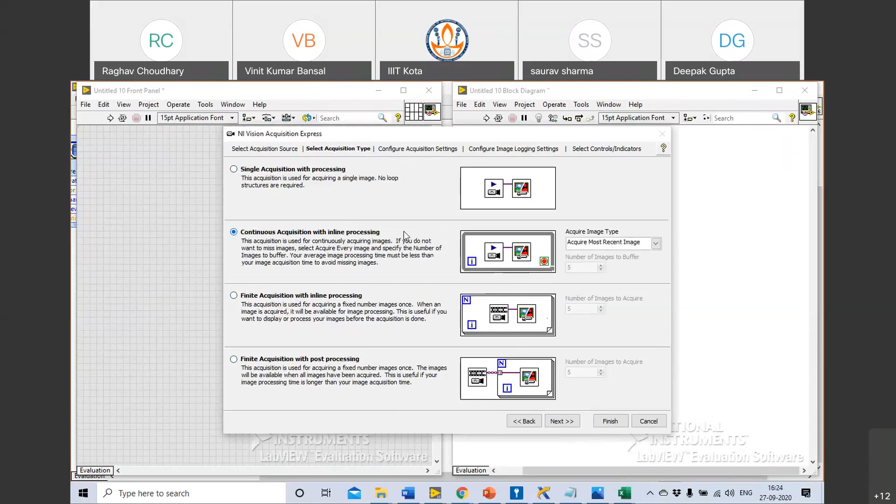I typically use continuous acquisition with inline processing, and I click next. It asks whether I want to log images; I don't. It asks what controls and indicators I want on the screen. I want the image number and the frame rate. Others I will leave and say finish. It's creating a LabVIEW VI. Okay.

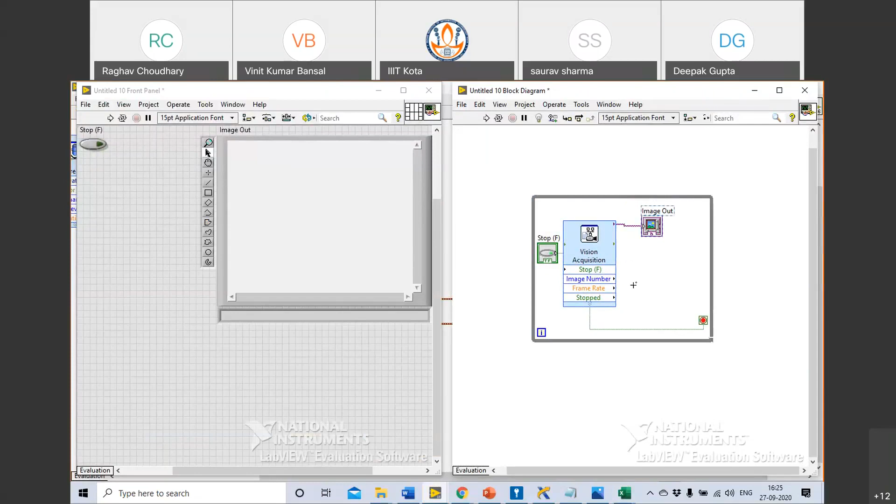Okay, so I have this while loop. I will create some space in the while loop to run this. I will look at the frame. I'll create a frame rate indicator here. Okay. Now I'll run this. You will see images being acquired in real time.

So it is right now not showing the full frame. It is showing half of the frame. So I can right click this and say zoom to fit. Okay. So you have a full view on the screen, and I can stop it. So by just simply putting this block, we are able to acquire images from the camera.

While you work in the industry, definitely you will not acquire images from the computer camera. You will use an industrial camera. What does an industrial camera look like? I'll just show you. An industrial camera is typically like this. Yeah, these are the standard cameras for a company called Basler. It's a German company. They typically connect over USB 3, Ethernet, or Camera Link to a computer. Okay.

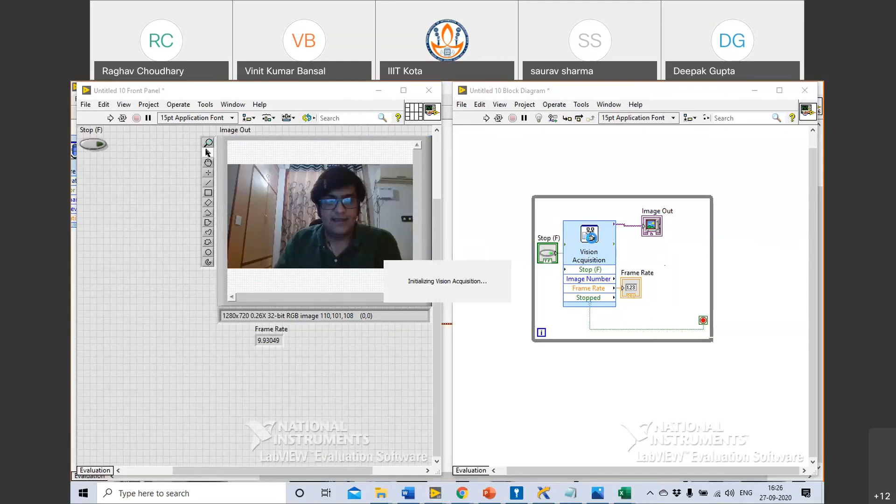So we acquired images. Let's see how we can process these images. I'll run you through a few examples of processing these images. Before that, I promised that I'll help you understand how to acquire from a folder of images. Let's do that. So I'm again opening the vision acquisition block. And I would go back to the acquisition source. I will choose folder of images at the acquisition source.

I would say next, continuous acquisition with inline processing. And now it gives me an option to choose folder of images. Let's say I use this image, cycle through the images. You can also enter this path. These images will be installed on your system as well. Okay. It is building the program. It has built the program. Now you can see it is picking up images from that particular folder.

Is that okay? Is it quite intuitive, difficult to understand? Guys? Hello? Am I audible? Yes, yes. You are audible, Vinit. Okay. Yeah, someone said it is easy, sir.

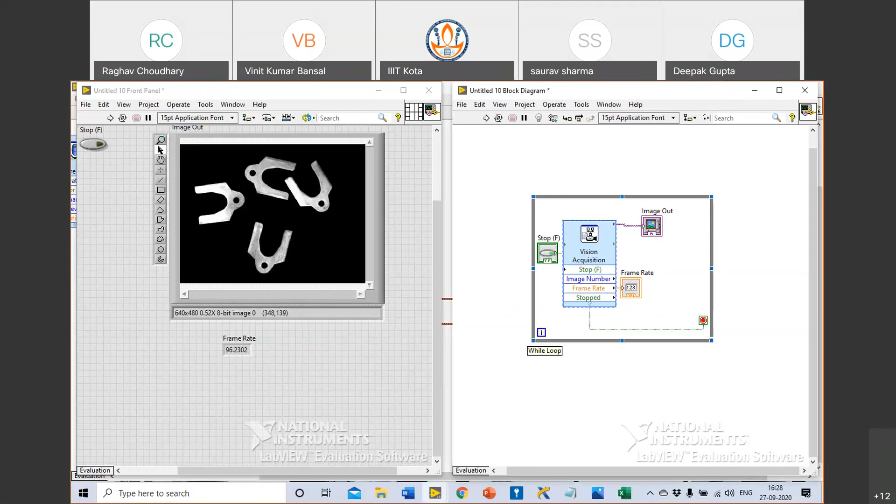Okay. I hope it's easy for all of us to understand how easily it can be done. I'll not spend too much time on this because it's quite intuitive. So let's get into the processing piece, which is slightly tougher. So do one thing: simply go to your start menu and type Vision Assistant. Okay, I will have to disconnect my second monitor before I open this because it needs a minimum resolution. So I will disconnect my second monitor and then try to open Vision Assistant.

Okay. Is everyone able to open Vision Assistant? I have reconnected back my second monitor. Okay, opening. It's opening, sir. So it's showing an error message. What does the error message say? It's saying Vision Assistant requires a minimum display resolution of 1152 by 864. Check your display properties. Are you using two monitors by any chance? No, I'm using a single monitor. I'm on a laptop, sir. What's the display resolution of your laptop? I have to check it. Yeah, just go to your display settings. You will find the resolution, right?

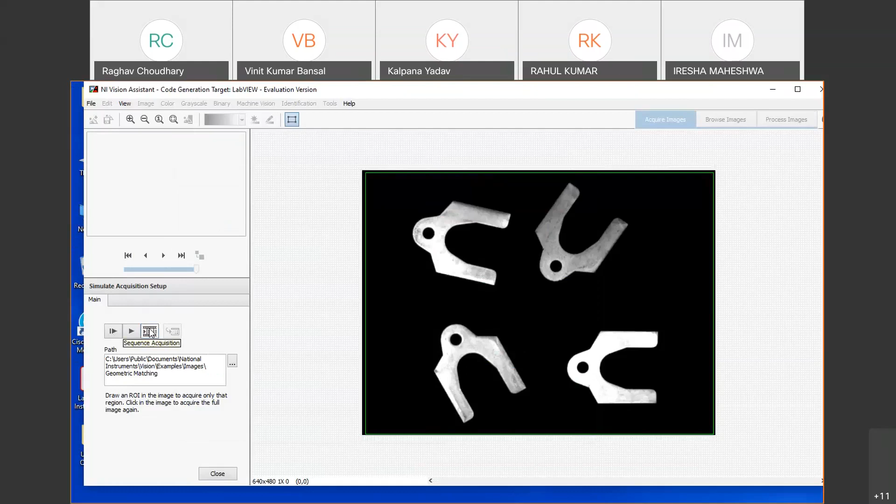Once you are in this folder, you can click on this option. This option will help you bring all the frames from that particular folder to the Vision Assistant window. So click on this, it will acquire a sequence of 11 frames. After clicking on this, I got this window and I would say next, finish. It is acquired, not yet. Oh, I had to click next to start the sequence acquisition and then click finish. So I can see each of these images. Done till this point.

Okay, I'll close this now, go to process images. Now let's say in an industrial application, these are certain sorts of washers. Let's say these washers have to go to the customer as a spare part. On a production line, we want to evaluate whether at least 4 of these washers are going to the packaging or not. So we put the camera, we grabbed images of the conveyor belt with these parts going into a single packet. I want to count these elements, whether they are enough or not.

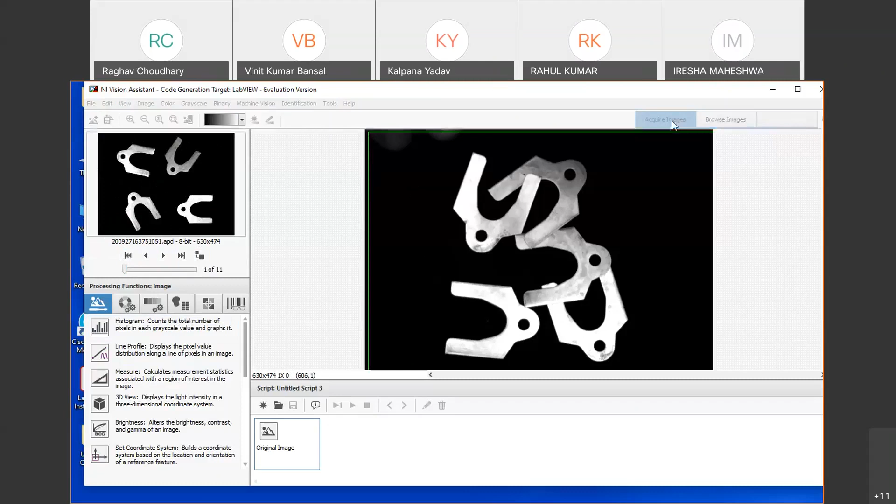So let me take a good image where they're not overlapping. Yeah, this sounds like a good image. I will use this image to create a pattern for geometric matching. Okay, there seems to be some problem. Okay, I had to go to browse image. After acquiring, I had to go to browse image. In the browse image, I can choose this image.

Once I have chosen this image, I will create a pattern of this particular object and run a geometric matching algorithm. Let's do that. So we acquired images, in the browse panel we chose this image where creating a pattern is easiest, and then we'll process these images. To process them, I go to the processing functions machine vision palette. In this, I have an option for pattern matching. I've clicked pattern matching. It will allow me to create a pattern. I would say next, and again next.

I would say finish. Okay. Sir, where did you find the pattern matching? I'll do that again for you.

So these are various processing functions in Vision Assistant. Okay. The first one is if I want to change the geometry of this image. Let's say I want to rotate this image. You can see image rotating. So first one is for geometry, masking of image, changing the brightness of the image. You can see the right image is very much bright. Right? So various processing options are available here.

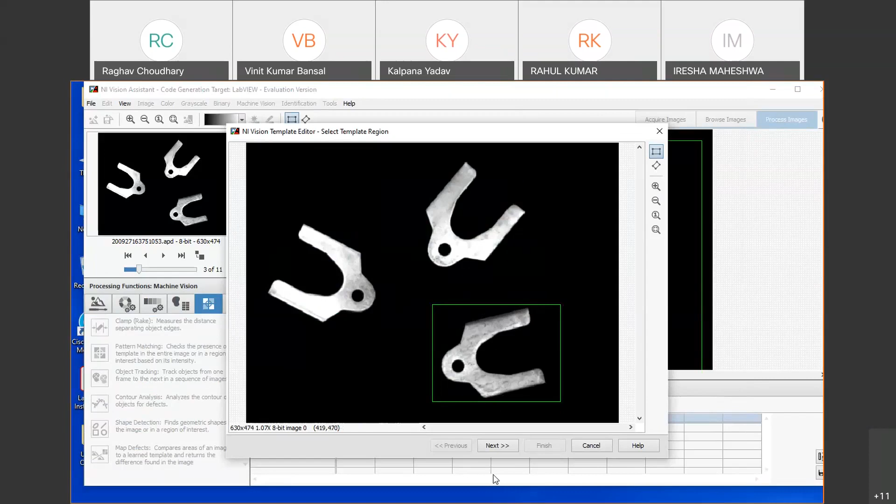So this is the area from which I want to create a template. I'll click next. Again, I'll click next. Here, you can remove a certain piece of the template. Let's say I don't want to consider this as a part of my template, then you can remove it. But I want to choose the complete area. Okay, I have removed this. Now it will consider all of this complete image as a template. If you want to remove certain sections, you can simply draw with your pen and remove them.

I would say next and finish. It will ask me to save the template. So I'll name it as template, saving it on the desktop, a PNG file. Now it asks me to set certain settings of this algorithm. First of all, it is asking me number of matches to find. I'll make it at least 5 or 6. So it will help me find 6 of these matches. Right now it has only found 1 match.

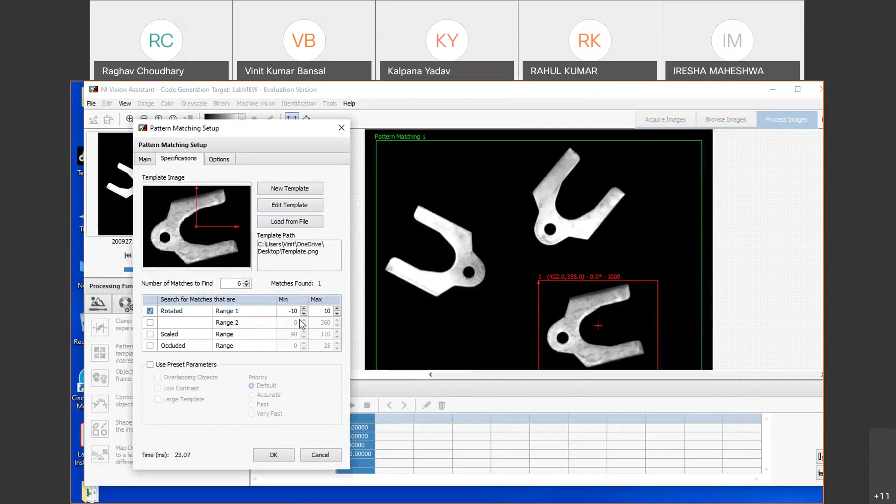Let's look at other settings. Other settings is, can this component be rotated? If yes, in what range? So right now it is selected as -10 to +10, but my component can be anywhere between -180 to +180 degrees. As soon as I do that, you can see the other 3 are also detected.

Now they can also be scaled in certain cases - one could be smaller, the other bigger, or it could just be the camera perspective angle. So I'll switch on scaling, somewhere between 80% to 120%.

They could also be overlapping with each other, as we saw in certain other samples, so we'll also increase the occlusion. They can be occluded up to 25%.

Then I'll go to further options. I'll leave the algorithm to geometric match, which is basically pattern matching with size and orientation invariance. The way pattern match works is it takes a pattern and tries to correlate that pattern across the whole image. Wherever it finds the maximum correlation, or a correlation score greater than the score set by the user, it declares that a pattern is found.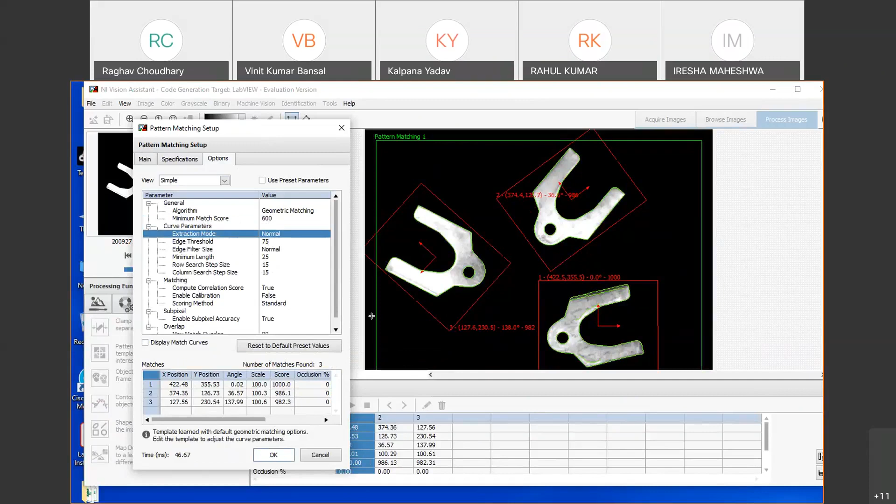Once I say okay, I can test it for other images by clicking this run button. You can see it has found 4 - can you see it has found 4? Now it has again found 4.

And this one also it has written. Can you see 4 boundaries? Yes, red color boundaries - it is detecting those.

If I double click this, I will be able to see the score of all 4. Now I'll run it further. Now even if they are occluded, meaning one is overlapping the other, I am still able to detect them.

So what we will do next is, we used this software to quickly prototype our algorithm. We will now quickly export this program to LabVIEW and use it there. How do we do that?

Go to Tools, create LabVIEW VI, choose a path of the VI. So I would say desktop, geometric match, and metal strips, and let's say it's around 450 now. I would say okay.

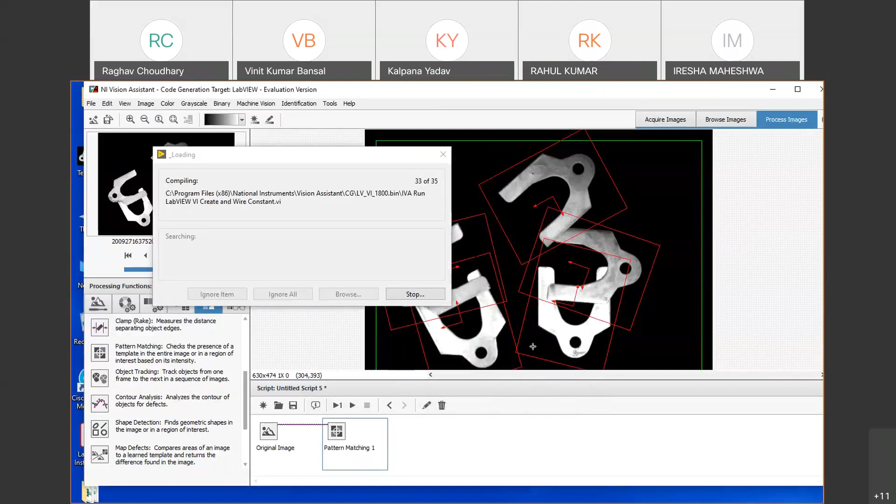So, hello? Yes. Yes, sir. So, in the image source, we are using image acquisition or image file. Image acquisition, sir. Why not image file?

Because these images are coming from a file, right? If I choose image file, it will pick up only one file, which I'm using right now, which is on screen. But what I want is to cycle through the folders, so choose image acquisition in that case. Once the program is built, we will make certain changes to cycle it through the folder.

In the controls and indicators, does anything need to be done? In the indicator, choose all of them.

What? Matched, calibrated match number. Okay, this will tell me, understood. You will basically find out.

In the control, these three options - what is the significance? ROI, descriptor settings, and template file path. Template file path gives the image path of the image source. We had created a template while making the pattern match algo, saved onto the desktop. If you make that a control, LabVIEW will allow you to choose this template from the LabVIEW window.

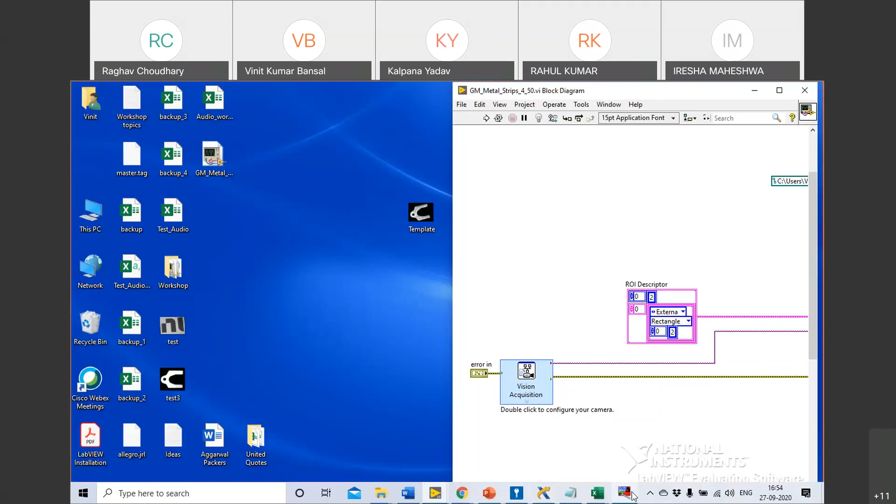So I think Raghav asked this question about the template file path. Right now I have not chosen it as a control because I want it to remain constant, but if you want to give it from the user side, you can select that. What Raghav is asking participants is, while we create this LabVIEW VI and give image acquisition, should we choose these or not? What's the significance - template file path, whether you want to give it or use constants?

If you don't select this, it will use constants. Settings will be the camera or acquisition settings - I'm choosing constant because I don't want to give it from the user side. ROI descriptor also choose constant - that's what I've asked the program.

Okay, I've cancelled it because I've already built the program. Is everyone with me till this point? Are all of you able to make the program?

Sir, in my case LabVIEW 2015 and NI Vision 2015... choose LabVIEW 2018. So while you go ahead, you don't have an option to choose 2018? Okay, that means while installing, probably you have not.

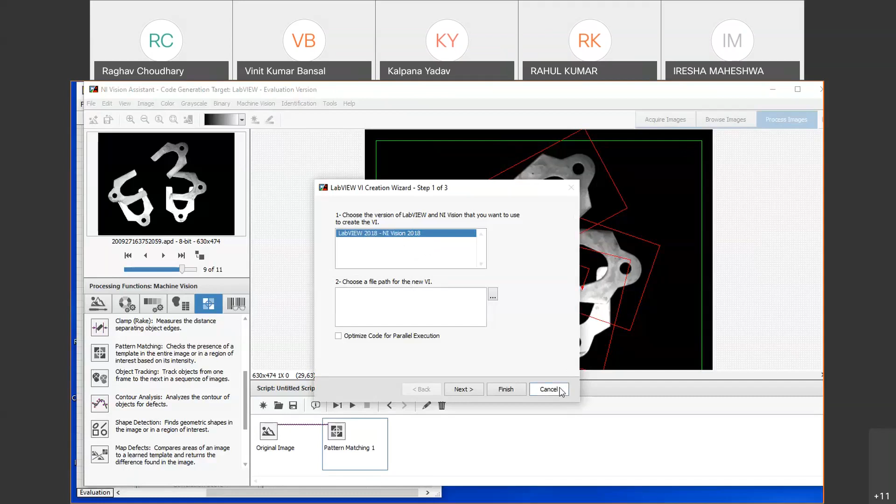Did you install Vision Toolkit before installing LabVIEW 2018 by any chance? I have installed LabVIEW 2018, NI Vision 2018 tool. Then ideally you should have an option here, ma'am, but I can look at your system separately. I got it, there's some installation error - I can help you out separately to correct that.

For now, when you build it with 15, can you open it in 15, or is it not opening? So it's opening in 15 with some error. For now, you can follow what we're doing right now. I will help you out separately, maybe after the workshop or tomorrow when you are available, to sort the error.

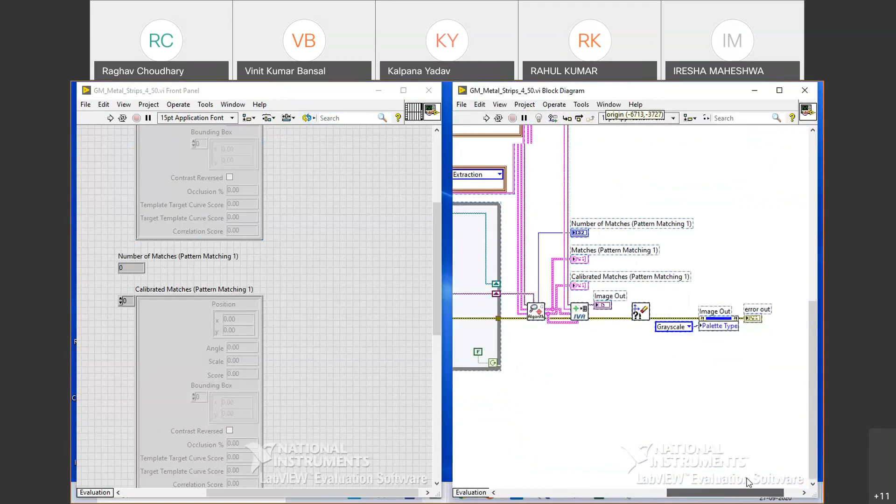So right now, once you acquire it, a program is automatically built in LabVIEW. Go to the block diagram, Control A, and press Control U. First, let's clear the diagram a little.

Still, it's a huge one - because it's taking a lot of settings. If you remove those settings, it is just two VIs. There are a lot of settings and hence it looks bigger. This one is actually waste - it doesn't do much, it just finds the template path.

Now I'll go to the vision acquisition block, double click that. Now I'll click back, choose folder of images as the source, then click next. Continuous acquisition with inline processing - no, I will leave it to single acquisition with processing, the first one, and click next.

Choose the same folder again which I had given in the chat window: Users, Public, Documents, National Instruments, Vision, Examples, Images, Geometric Matching. Choose one of the images from here and folder of images. Sir, here only any one image will be chosen or the entire folder?

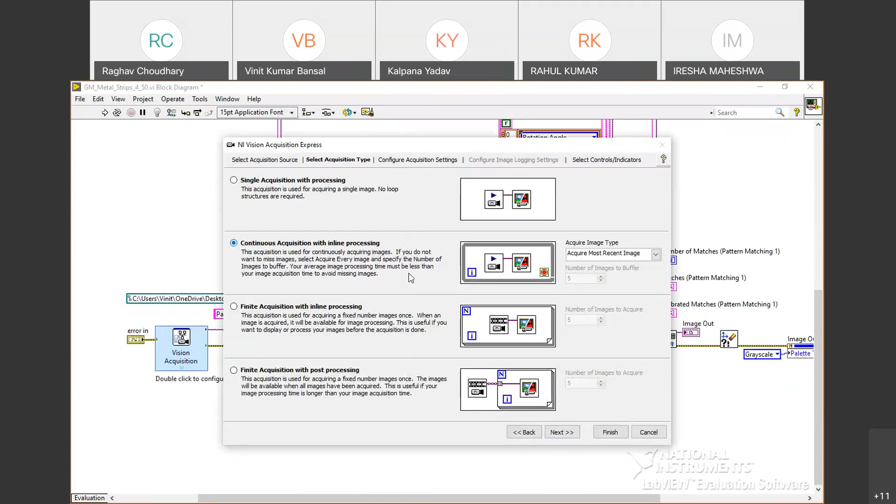Actually it has to be the folder, but I have made it single acquisition here, so it's causing a problem. What you can choose is continuous acquisition with inline processing. Choose continuous acquisition with inline processing, then it will give you an option to cycle through the folder of images. Then you can simply finish this. Okay, it is done - now it will cycle through that folder and find out images.

Now we have a hard task at our hand to put a while loop around the whole of this program.

And create a user control to stop it.

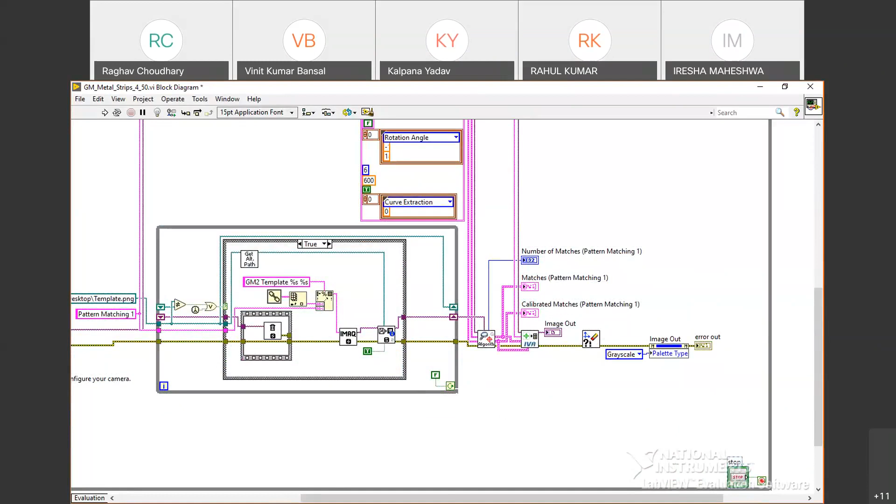Sir, I'm facing some problem. Yeah, what's the issue? I've changed it to continuous acquisition, then navigating to geometric matching. Pressing OK, nothing is happening, it's asking for a file name. Okay, let me see what you are facing problem with. Have you chosen a file here? First we went back and then gone to folder of images, then continuous acquisition with inline processing.

Then as a cycle through folder images, I have to tick that. You have to tick that and choose a file. Choose any one file to start with. Okay, sir. Understood.

And say finish. Is everyone with me? I know it's been a little long, we've had a long session, but I hope you are following me.

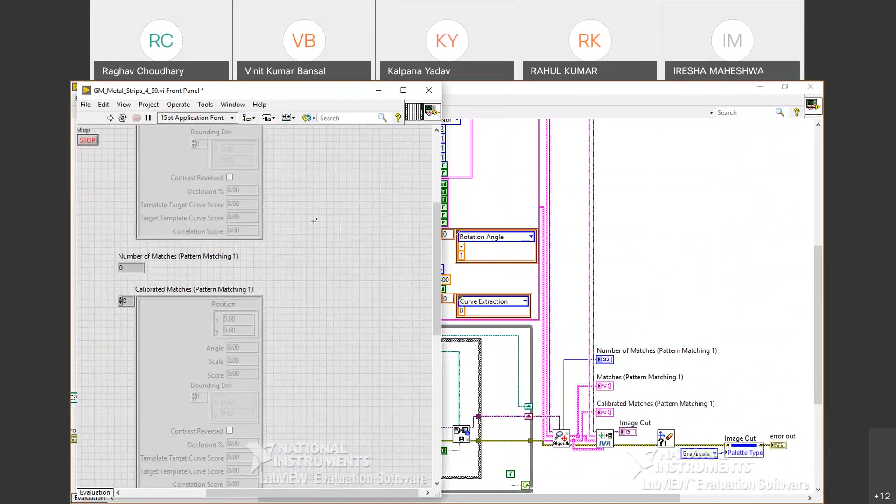Okay, once we have done that, we put the while loop around the whole program. We have a few more things to do. After putting the while loop, we'll first of all come to the front panel. Okay, take this image, let's align our front panel a little, it's right now very distributed.

Sir, we'll turn on the indicators, right? What do you mean by turning on the indicators? I mean, we'll tick the indicators like image number and frame rate indicators. Where, sir, after choosing the file? Not required, it's your choice. Yeah, you can read it or you may not read it. Okay, sir, for this application we don't need it.

Is everyone with me? If no, please feel free to put it on the chat window, guys. Then after that, we'll put this setup inside a while loop. Yes, we'll put the entire setup inside the while loop.

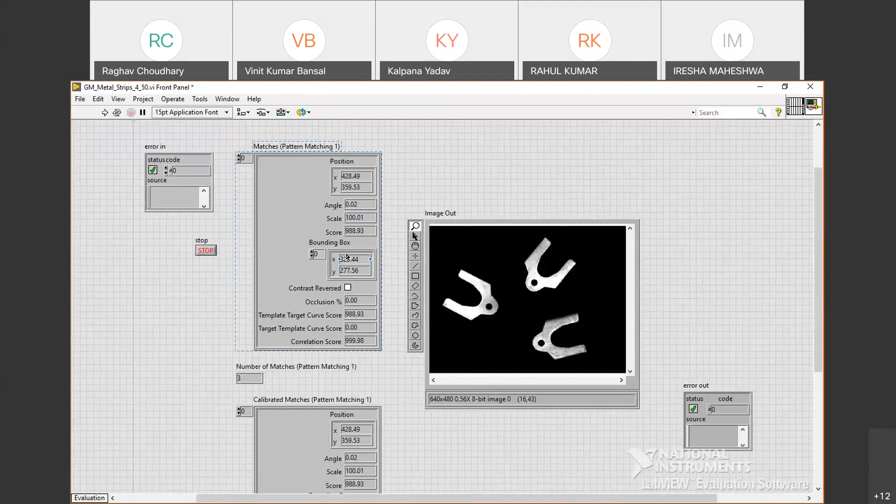Okay, I need to pass this bounding box to the overlay lines block. So what I'll do is I will say unbundle by name, and this is an array, right? So I'll put a for loop here to process all the bounding boxes, pass one by one.

So I'm not giving an N terminal to the for loop. Do you know why? Can anybody guess? Number of matches will vary. Because the number of matches will vary, and I have given it as an indexed tunnel. That means, let's say X matches are found, this loop will run X times, and will create X boxes on the image out to show the red colored bounding box, right?

So now, how did you get a bounding box? Control plus space and search, Control plus search, unbundle by name. To get certain components of a cluster, we use the unbundle by name feature. Once you put unbundle by name, you connect it to the matches, it will show you various options, out of which I have chosen bounding box.

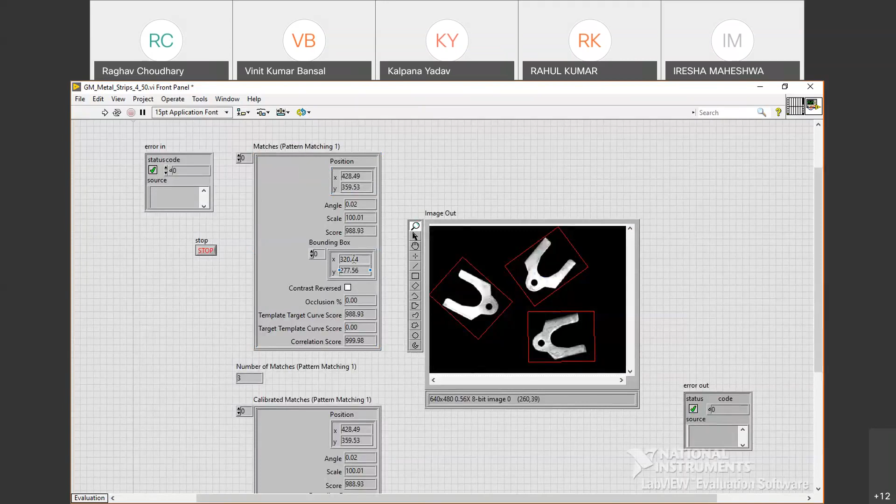You have passed it through the for loop as an index terminal? No, I've not put the for loop yet. Yeah, you have to put a for loop because it's an array. It's an array of clusters. What we need is information from the cluster. So first of all, the array has to be indexed. To do the indexing of the array, we have to put a for loop. Bounding box, okay.

Got it, sir. Got it? Yes. Great. Then we can run the application. Sir, but until and unless we stop the while loop, we don't get to see the boxes. No, we will. It is inside the while loop, right? Or have you placed it outside the while loop? Sir, it's inside the while loop.